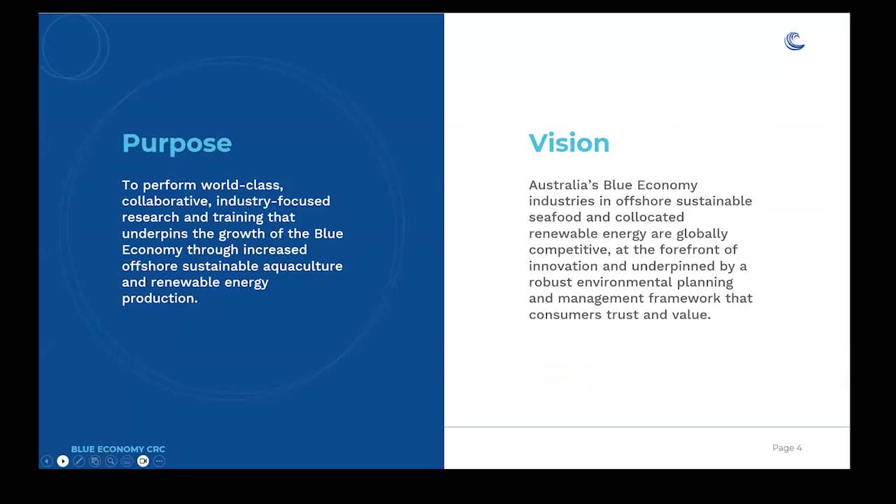Now, today's webinar is about the Blue Economy Symposium that was recently held at the 2025 OMAE conference in Vancouver. For over 4 decades, the OMAE conference has been the premier annual event to showcase leading-edge innovations and technological achievements in offshore engineering. Held within OMAE, the Blue Economy Symposium focused on the sustainable use of ocean resources for economic development, often featuring research and discussions on topics such as aquaculture, renewable energy, and offshore technology. Now, this webinar will highlight about 5 presentations from the Blue Economy Symposium event, providing an opportunity to hear high-quality research and gain insights from industry leaders on the current and future directions of the blue economy.

So please welcome our 5 guest speakers who will be presenting for us today. The first speaker is Associate Professor Zhi Yung Tay, an Associate Professor in the Engineering Cluster at the Singapore Institute of Technology. Our second speaker will be Thomas Johansson, co-CEO at Ocean Oasis AS and Senior Principal Specialist at DNV. The third speaker will be Associate Professor Peggy Chen, who is the Director of the Center for Maritime and Logistic Management, Australian Maritime College, University of Tasmania.

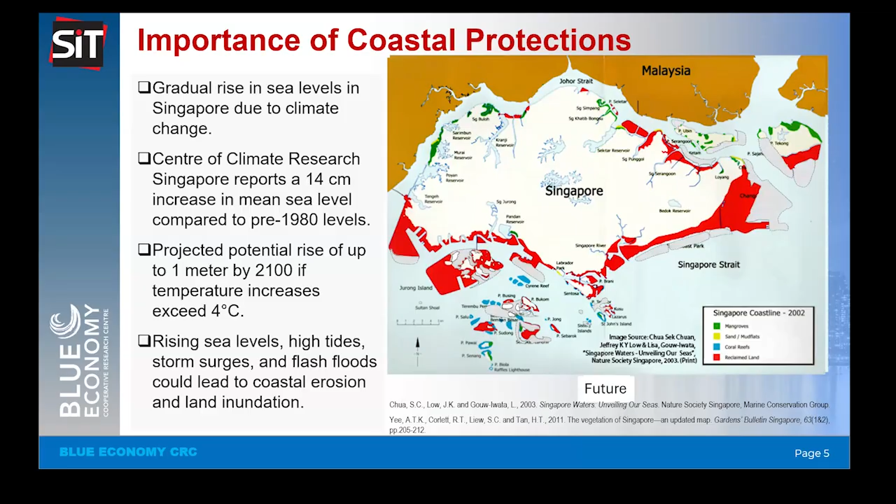So this shows the importance of coastal protection, and this map here shows Singapore in the 1950s. Back then, we still had a lot of vegetation, such as mangroves, which are important nature-based solutions to protect the shore against extreme weather conditions. Due to urbanization and the need for more land, land reclamation has been carried out in Singapore, and these red patches show the land that has been reclaimed. As a result, the number of mangroves as well as the vegetation has also reduced. And going forward, there'll be more reclaimed land. So if you look at the distribution of grey infrastructure around the shore of Singapore, most of it is seawalls, geotextiles, or breakwaters.

So even for the future, where we are going to protect the East Coast against the rise of seawater level, the bottom-founded land reclamation solution is sought in order to protect this area from the rise of seawater level. So the question then is, are there any other methods besides fixed grey infrastructures that can be used instead of these fixed structures or bottom-founded structures?

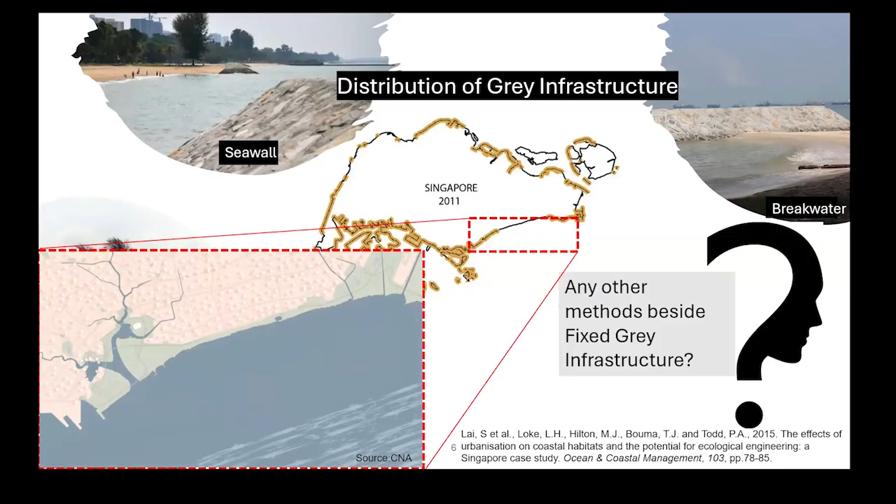So this project is a collaboration with NUS and NTU. It's entitled the Smart and Multifunctional Floating Structures for Coastal Protection and Flood Control. So in this project, we're proposing a floating breakwater that is multi-purpose, and this can be integrated with marine renewable energy, such as wave energy converters and tidal energy, to tap on this energy resource to generate electricity.

So floating breakwaters and marine energy converters, these are not new. There have been existing solutions in Singapore as well as around the world. For example, in Monaco, there is this floating breakwater, as well as in Sweden, breakwaters to protect the marinas from extreme weather. And one of the popular wave energy projects is this Eco Wave project, where they integrate point absorber arrays into the breakwater.

So the novelty lies in producing cost-effective floating breakwaters in relatively deep waters, and this will be tailored to the Singapore context in order to cater for the Singapore weather, as well as multifunctional with green energy harvesting in future applications.

All right, and some of the possible deployment sites, for example, in the south of Singapore, the southern islands, where we have good tidal energy resources, and this can be used also to create sheltered areas for industries such as aquaculture, or even to create a more sheltered area for marine electrification, such as charging stations for tugboats. So the novelty is to create a cost-effective floating breakwater in relatively deep waters and tailored for the Singapore context.

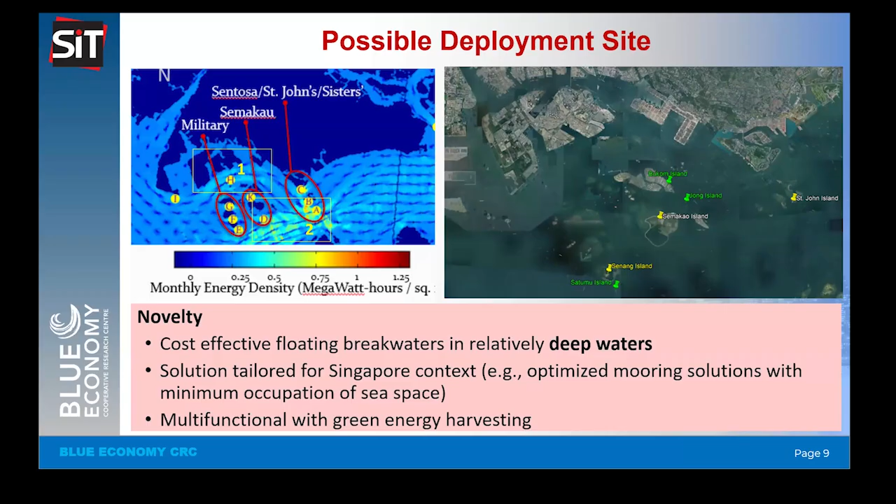So two types of concept solutions are proposed here. One is a fully floating breakwater, used for deep or intermediate water depth. And the second one would be a breakwater that is integrated with dikes or seawalls. So in the event of a rise in seawater level, the existing floating breakwater can still be used. Only the dikes and seawalls need to be retrofitted for designs of a higher mean seawater level.

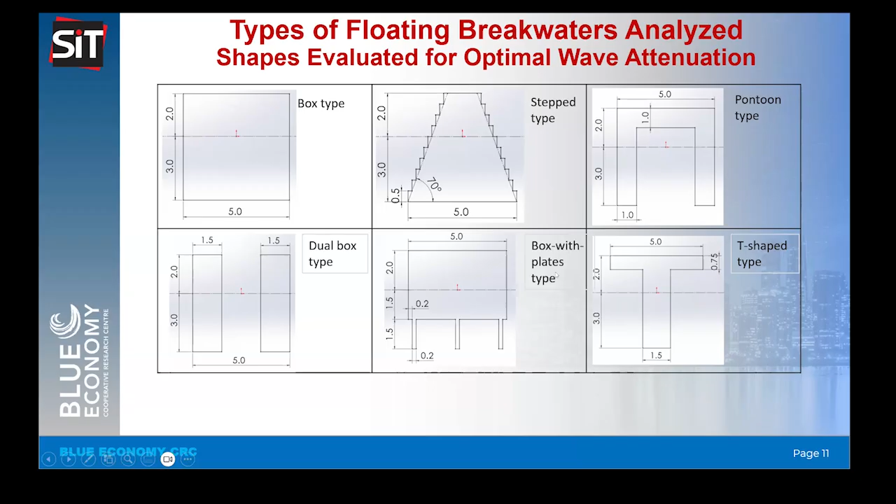So we consider 6 different types of geometry for the floating breakwater: the box type, step type, and also the pontoon, the dual box, as well as box with plates, and the T-shaped breakwater. So we use CFD simulations with ANSYS Fluent to obtain the wave elevations upstream and downstream of this breakwater. And the water depth is considered 10 meters. Wave height is 2 meters, which is a common wave height that we consider in Singapore. And 3 wave periods are considered, which are 4 seconds, 5 seconds, and 6 seconds.

So this is a result that we published in the World Conference on Floating Solutions back in 2024 in Hong Kong. So here we consider the two best geometries to attenuate the wave force, which are the pontoon type on the top as well as the step floating breakwater at the bottom. So here you can see that the step breakwater is more effective as compared to the pontoon type.

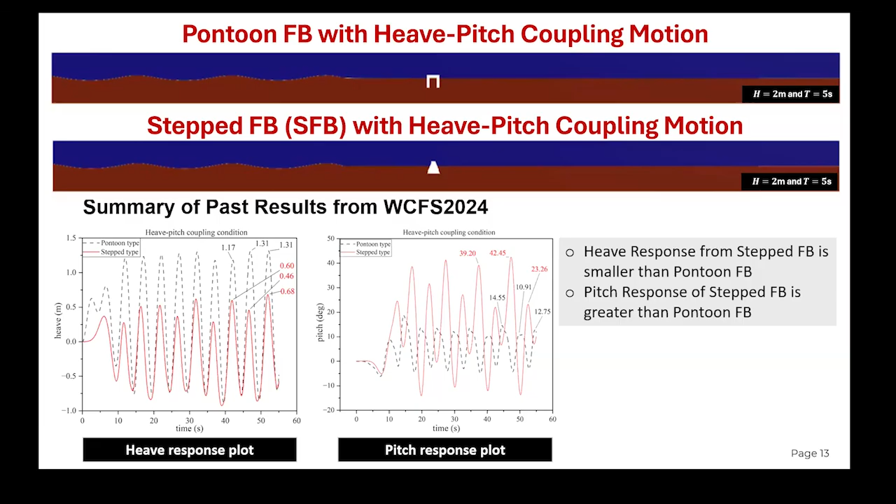And in terms of the motion, the heave response of the step floating breakwater is smaller as compared to the pontoon floating breakwater. But the pitch response of the step floating breakwater is greater than the pontoon floating breakwater. So again, this shows the wave elevations generated around the floating breakwater, and the step floating breakwater is proven to be a better solution as compared to the pontoon in terms of attenuating the wave force.

So then, we know that in order to produce a better design for the step floating breakwater, we need to constrain the pitching motion of the step floating breakwater, because this pitching motion will generate more waves downstream of the floating breakwater. So the research question then is what are the suitable types of mooring system that could minimize the motion of the floating breakwater and at the same time effectively attenuate the wave force.

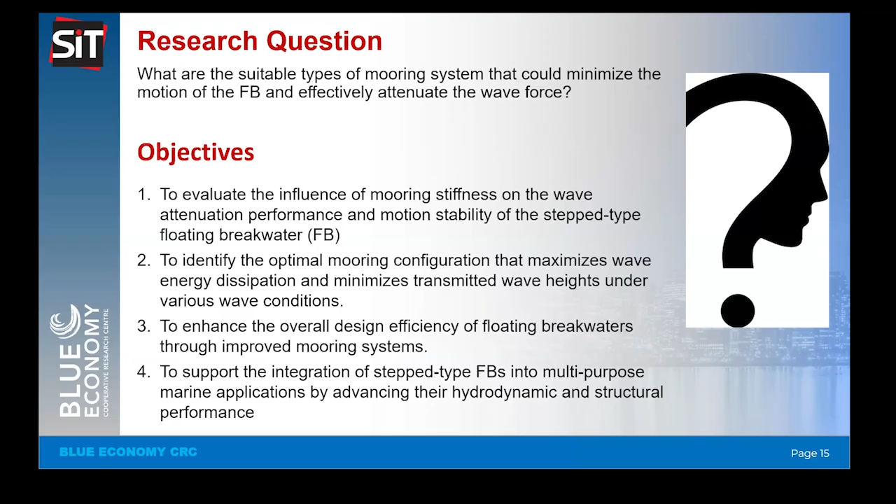So here the objective is to evaluate the influence of mooring stiffness on the motion as well as the wave attenuation, to identify the optimal mooring configurations, as well as to enhance the overall design efficiency of the floating breakwater. And here we show four different types of configuration. The first one is a step floating breakwater without mooring, abbreviated as SFB. The second one is the tension tendons, TT, the taut mooring, TM, as well as the catenary mooring, CM. So here we are considering regular and irregular waves, and the goal is to identify the most effective mooring configurations that enhance the wave attenuation and motion stability.

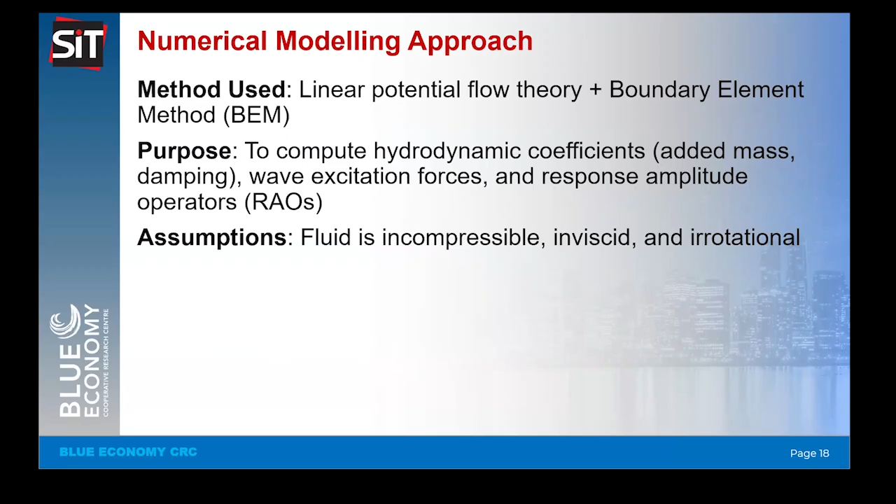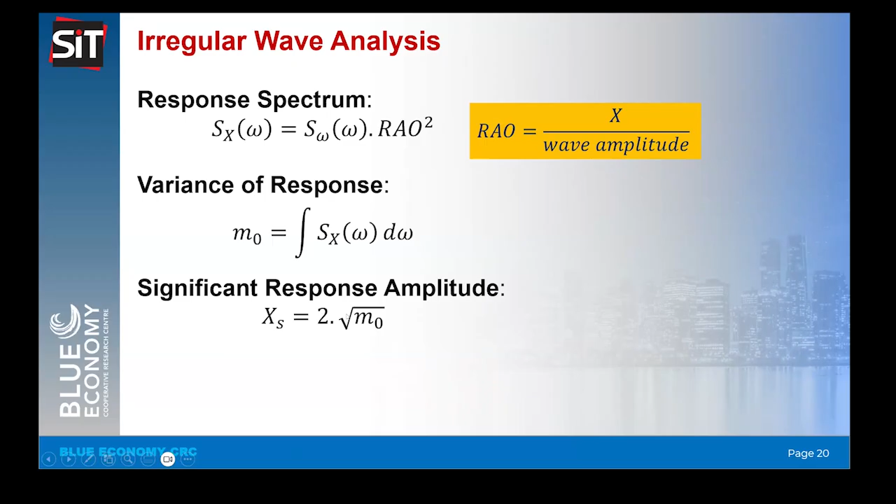For the irregular waves, we're assuming the Pierson-Moskowitz spectrum to generate the irregular waves. And in terms of irregular waves analysis, we'll be using these common formulations to obtain the significant response of the structures as well as the wave elevation. So now comes the results and discussion part. First of all, I'll be presenting the regular waves. This shows the hydrodynamic diffraction analysis of the step floating breakwater configurations.

For the unmoored step floating breakwater, the first natural period is around 4.1 seconds, and the second natural period is about 6 seconds. If we compare with the catenary mooring, the catenary moored step floating breakwater shows a significantly lower heave response as compared to the unmoored step floating breakwater. And it also has a lower second resonance wave period as compared to the unmoored version. This is because of the increase in the stiffness that will change the resonance period. And then for the tendon tension, there is a negligible heave response observed for both tendon tension and taut mooring configuration.

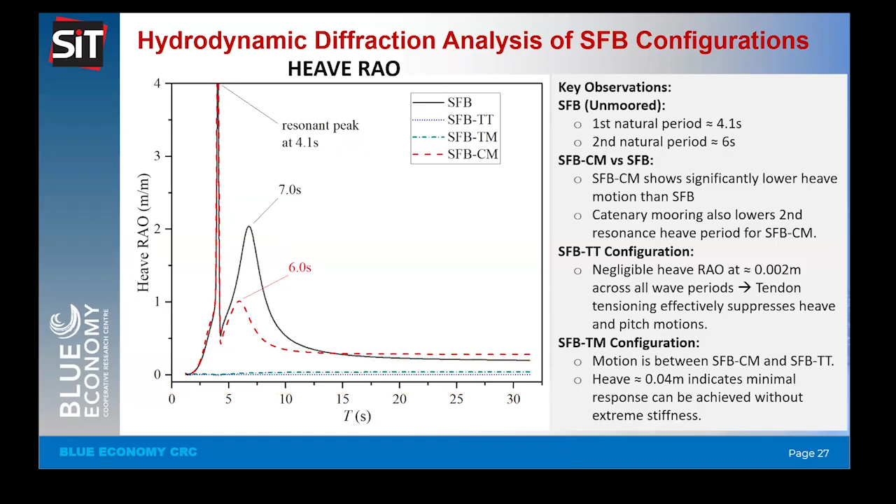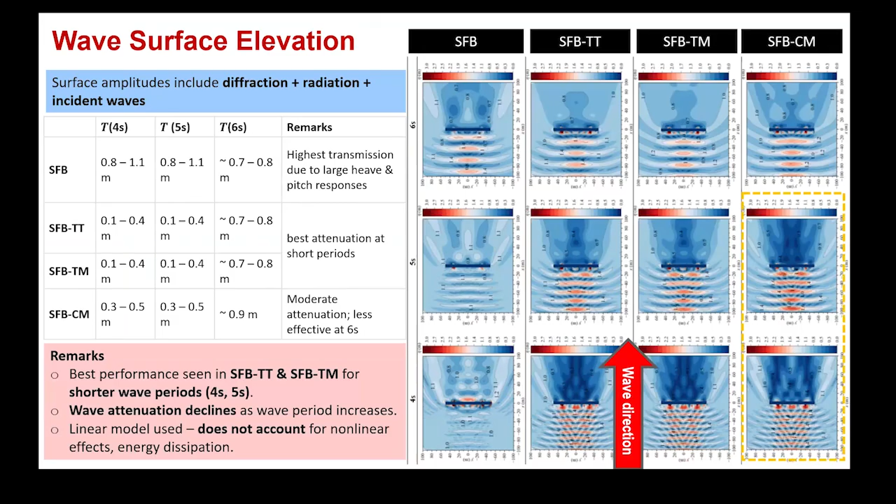So this shows the surface elevation surrounding the breakwater. The waves come from the south to the north, and the red contour shows higher wave elevations. Here we can see that for the unmoored step floating breakwater, the highest transmission occurs due to the large heave and pitch response. And for the tendon tension and the taut mooring, the best attenuation occurs when the wave period or the wavelength is short. And for the catenary mooring, moderate attenuation is observed, and it becomes less effective when the wave period is high.

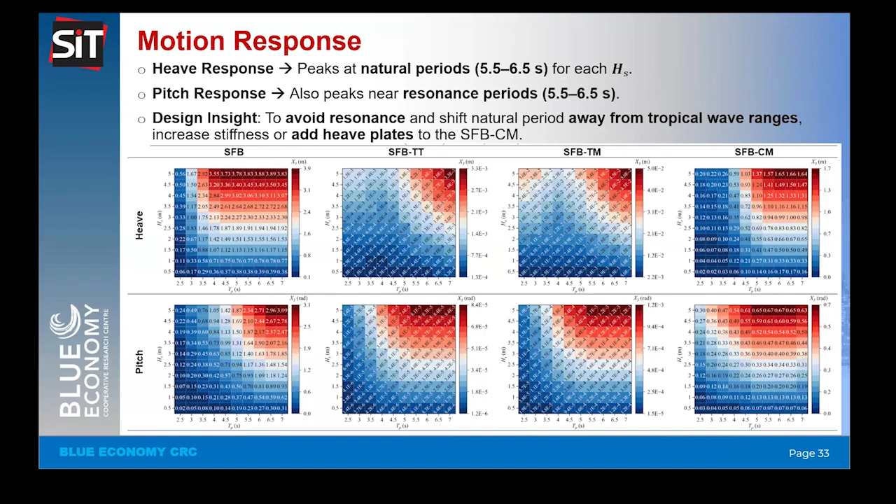As a conclusion, the stiffness actually helps to improve the performance of the floating breakwater in terms of the motion as well as the wave attenuation, especially when the wave period is small. The mooring stiffness plays a critical role in controlling the heave and pitch motion, and the taut mooring system offers a performance similar to the tendon tension, but with lower mooring stiffness, therefore making it a more efficient and viable alternative.

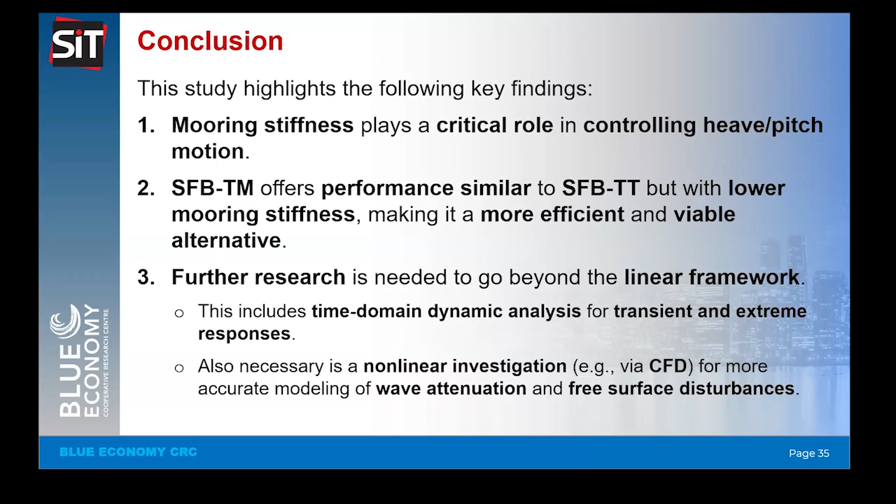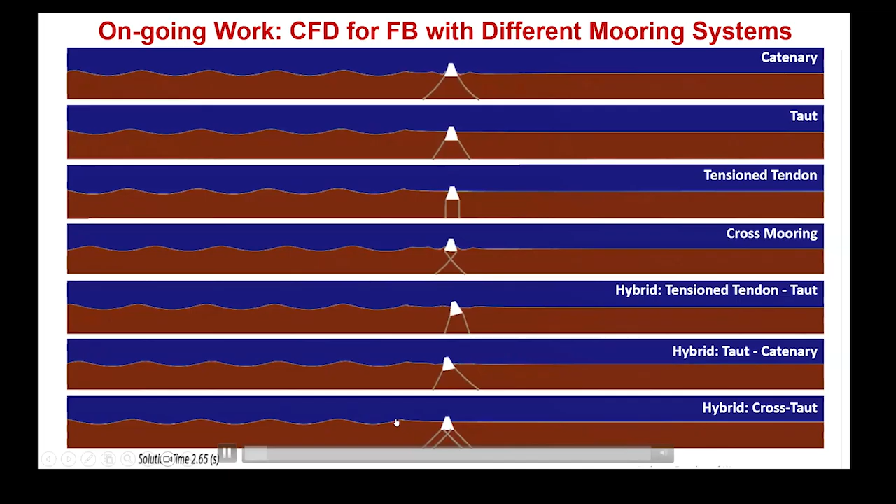And you can see also high reflected waves upstream the structures, where we can place, for example, wave energy converters in front of these structures to tap more energy, enhance the energy generation from the wave energy converters. All right, so that's all for my presentation, and I'm happy to answer any questions from the audience.

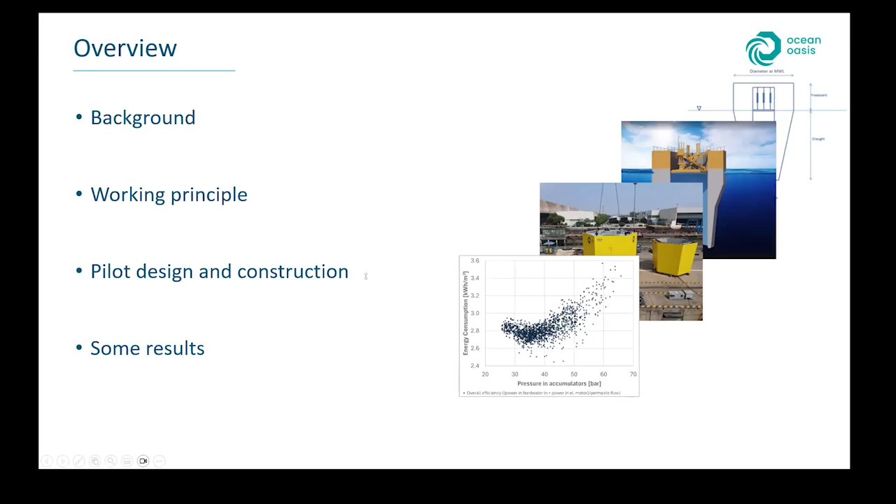Ocean Oasis is a Norwegian company developing a floating device for desalinating water using wave power as the only energy source. Today, I'll talk about our pilot testing, which we've been doing over the last 2 years. So quick background, go through the working principle of the Ocean Oasis, quick slideshow of the pilot design and construction, some results and conclusions, and to see a bit where we're going from here.

So this is the Ocean Oasis desalination buoy. My background is in offshore engineering. I started when I was doing concept development for Aqua Solutions, trying to, as an exercise, basically, see how we can use the experience from the Norwegian offshore sector to create a wave power device. So we need decent efficiency. We need survivability of a wave power device. With my background, I'm super skeptical about fixed installations on the seafloor. I would prefer a floating unit.

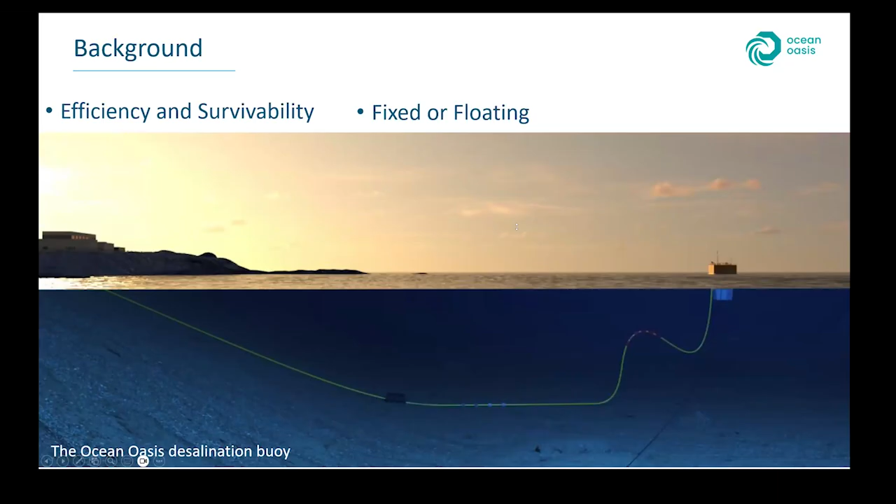And then what to use the energy for? Electricity is a challenge. Wave power is extremely variable. We decided to go for desalination of seawater. So you use the power to desalinate seawater. And this is the result: a floating buoy, a wave power device, desalinating water, leading water to shore with inexpensive hoses, the black type you see for all water transport, to an existing desalination plant on shore, providing additional water to existing desalination plants.

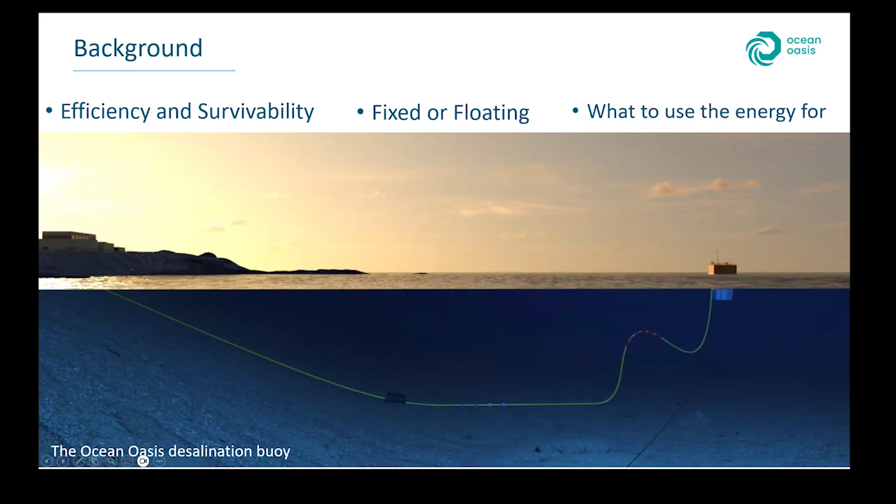So the working principle of wave power: instead of a fixed point on the seabed, we're using the relative motion of two large masses. One mass is the buoy itself, and the other mass, which we get for free, is the large volume of water inside a moon pool open to the area below. So if the wave frequency is between the natural frequencies in heave of the buoy and the resonance of the moon pool, then the mass in the moon pool and the buoy will oscillate in different phases, and we can take out the energy by the relative motion between the two. The disk is not part of the physics, it's just giving us something to grab onto to get that relative motion out.

So this is from a model test taken many years ago. One camera showing the buoy itself from the outside, and one camera looking down into the moon pool and the disk. You see that for moderate waves, we get quite a large relative motion. Energy is taken out here in the pistons between the disk and the buoy. And this is a lot of force here, so you can't push these together by hand. So it's a reasonably efficient wave power device, taking around 35% of the wave energy that passes the buoy out.

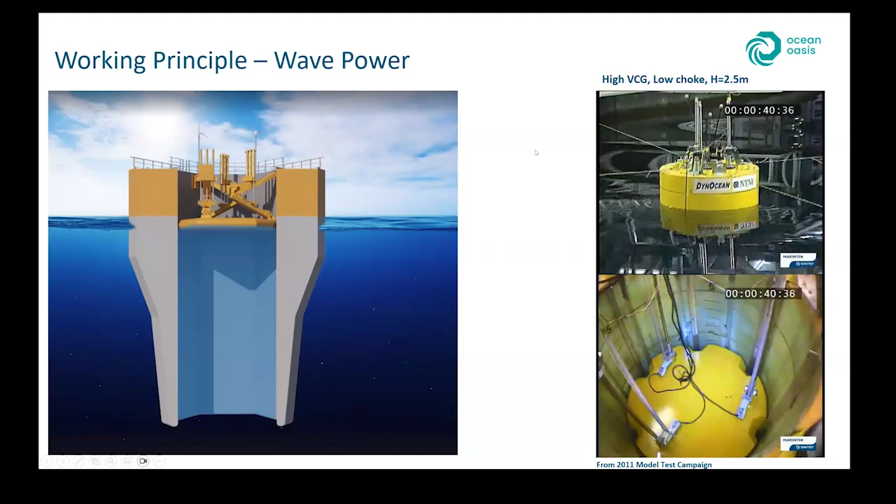Now, the working principle of desalination. Desalination is energy intensive, and the energy is used to pressurize seawater, drive it past a membrane so that only fresh water leaks through. We can't pass it through because then the membrane will be full of salt. We need to pass it past the membrane. Then we get super salty water out to the right here, and we need to recover that energy because that's still high pressure coming out here. So that's the fundamentals of desalination by reverse osmosis.

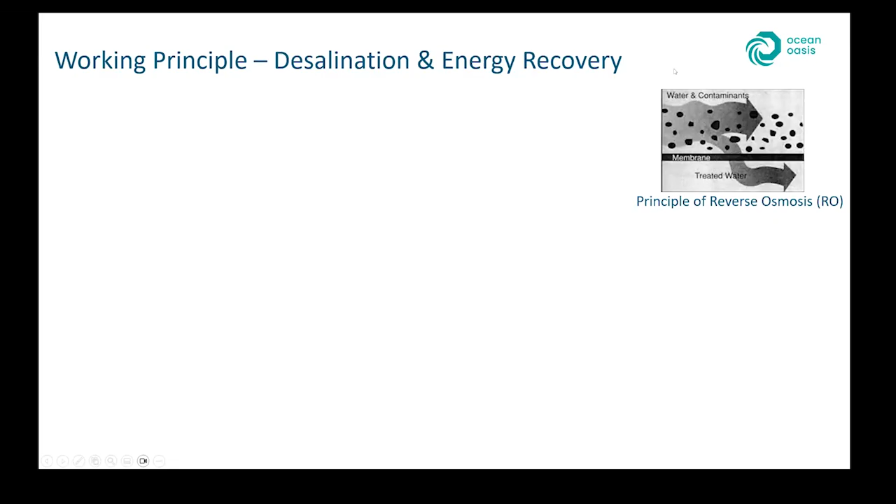Wave motion is extremely irregular, as you all know. We need to stabilize it because the membranes are quite delicate. We use an accumulator, but if you wanted to stabilize it sufficiently with accumulators, because of the extremely irregular nature of waves, you would need far too big accumulators.

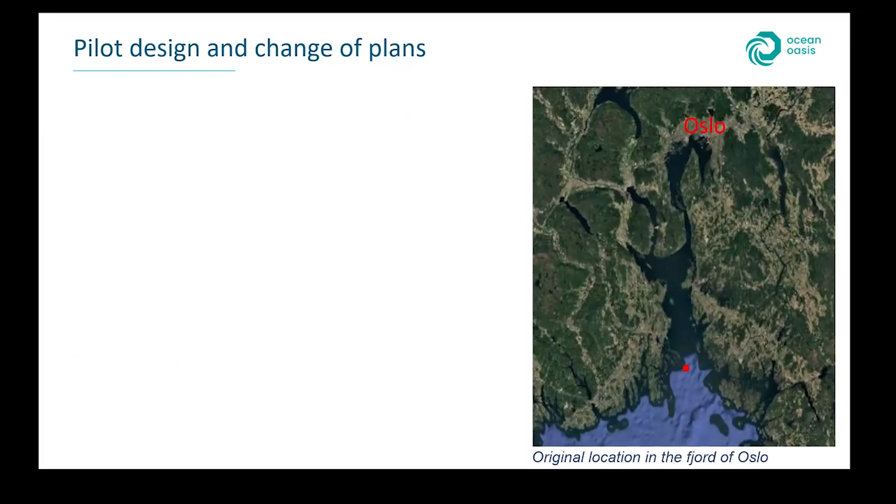Now pilot testing. We had the money to do a pilot test. We were going to test in National Park, and we got permission to test south of Oslo in the outer fjord of Oslo. This is an area I know better than my own living room. Relatively short waves, relatively low waves, and full control. This is a typical full-scale configuration for this environment. 7 meters diameter of the buoy, 8-meter draft, just over 100 tons displacement.

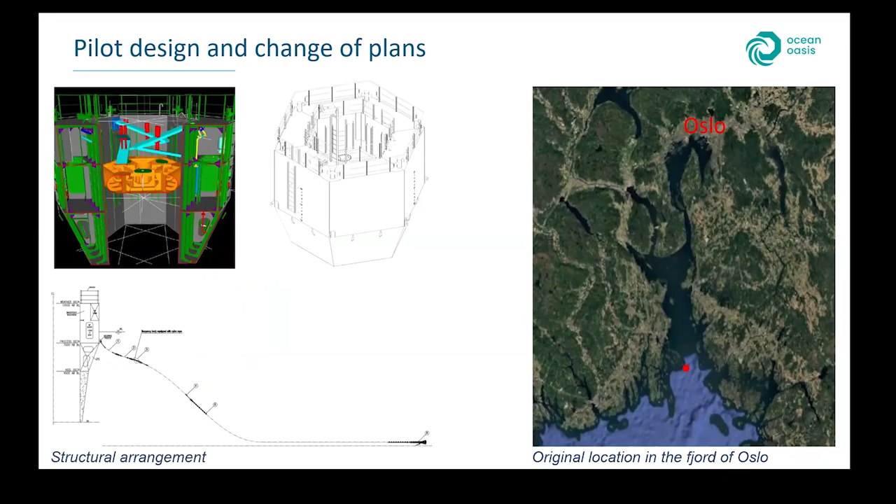So these are the sketches. We got a boat yard to make proper drawings to build this. Very simple catenary mooring system, and provided conservative loads for the shipyards to work with. So far so good. Then it got complicated. Two things happened. First of all, COVID struck. So within a few months, the construction cost was almost twice what it was before COVID. And the transport cost from China to Norway was more than twice the cost.

We couldn't afford that. We cannot go to China on our own. But of course, we trust to luck, as we always do. And it helps to have friends. So one of our main investors turned out they have used the shipyard here in China for more than 20 years. They had people in the yard doing construction follow-up, and they offered to stick Gaia on one of their vessels and let her off on the way back.

So the other thing that happened was that we got an opportunity to establish a subsidiary company with offices and workshop in Gran Canaria. And that was really super for us. Gran Canaria is the main desalination hub in the European economy. And it's also our beachhead market. So we couldn't say no to that.

So we moved the whole system down to Gran Canaria and decided to do the pilot testing here instead of here. It's fine, except that Gran Canaria has much longer waves, much bigger waves. And Gaia, as our pilot is called, is too small. So we did a lot of recalculations. We found that it can take it, but I lost my nerve on the mooring.

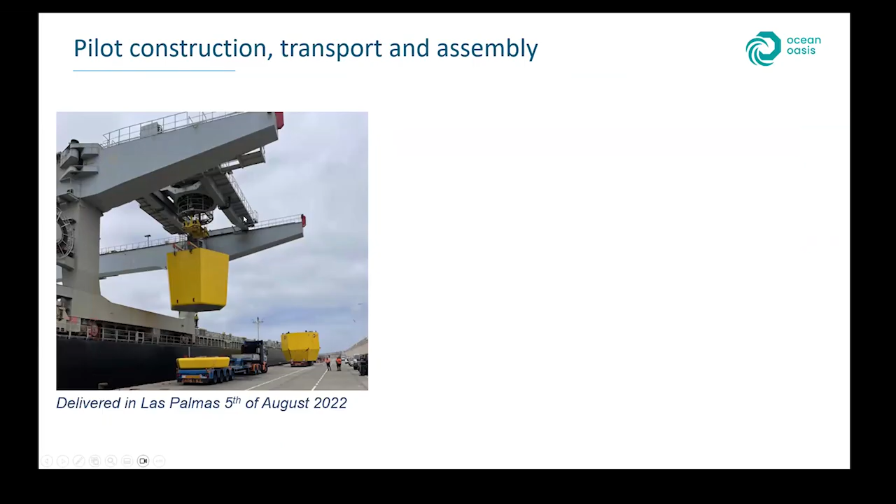Okay, so a bit of slideshow. This is construction in China, built in 3 parts: keel, main hull, and disc. Very good quality on the construction in the end. We're very happy with the solution we got. Nail-biting transport to Gran Canaria, delivered in Las Palmas. It's a big structure, but it was possible to take it on the trucks.

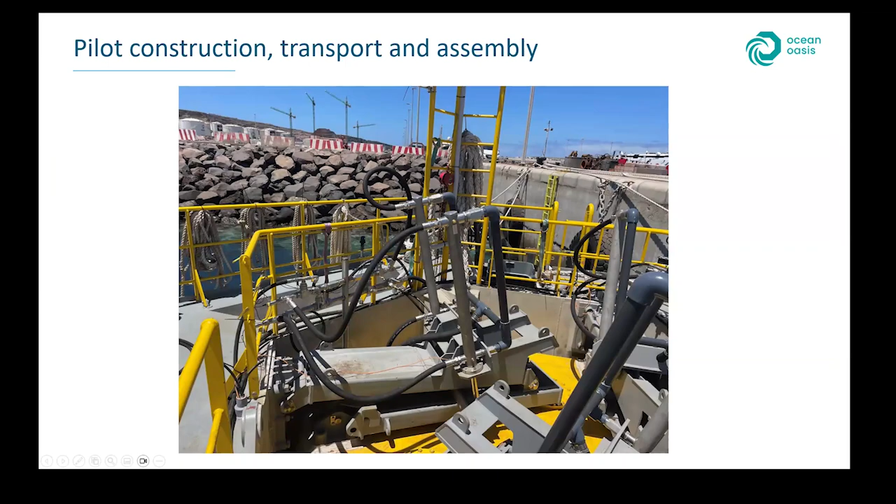Assembly here in Gran Canaria and launched to sea after anti-fouling. We spent half a year getting all the equipment and pipes and hoses and stuff installed. Naming ceremony with 3 of our directors. And this is Gaia in her home berth, where she's been for the last 3 years.

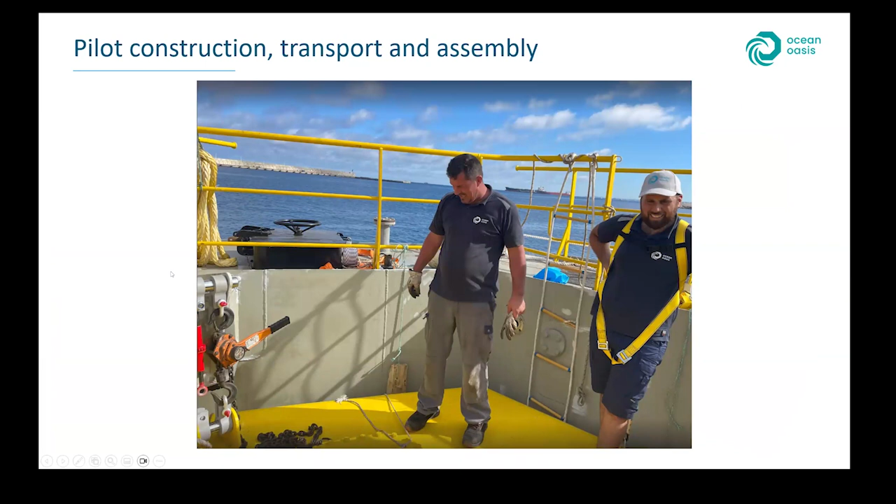Straight open to the south, very rarely, thankfully, waves from the south here. But it's been a real challenge to keep her, close to 100 tons, close to a concrete jetty. Lots of good times, and some bad times. This is where our chief mechanic finds out he's got 15 centimeters to go after lifting the disc manually for hours. First testing on Gaia in '23 was a big milestone.

And then after that, we've been testing. Instrumentation: we have motion, GPS, we have the relative position of the pumping arms. We have 5 flow meters on board, 21 pressure transducers on board. We measure freshwater quality, and we measure the voltage and current and charging state of the batteries on board. So we have 38 blocks of time series which we can analyze in stationary conditions.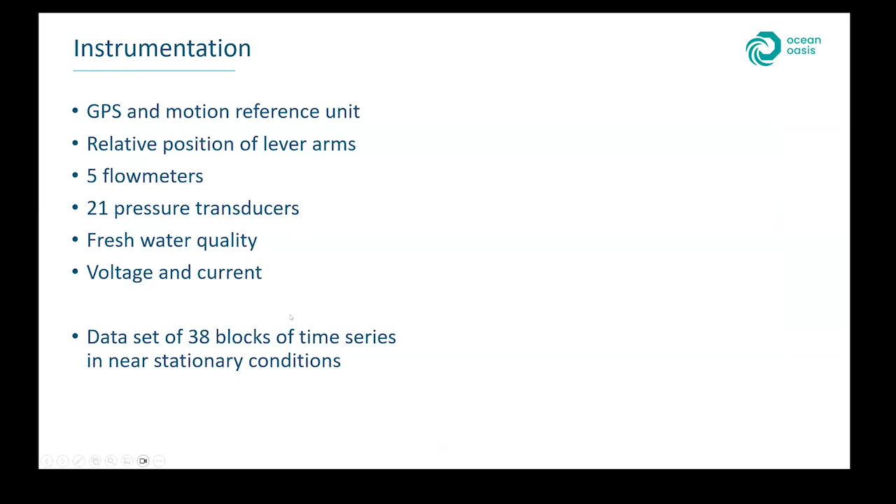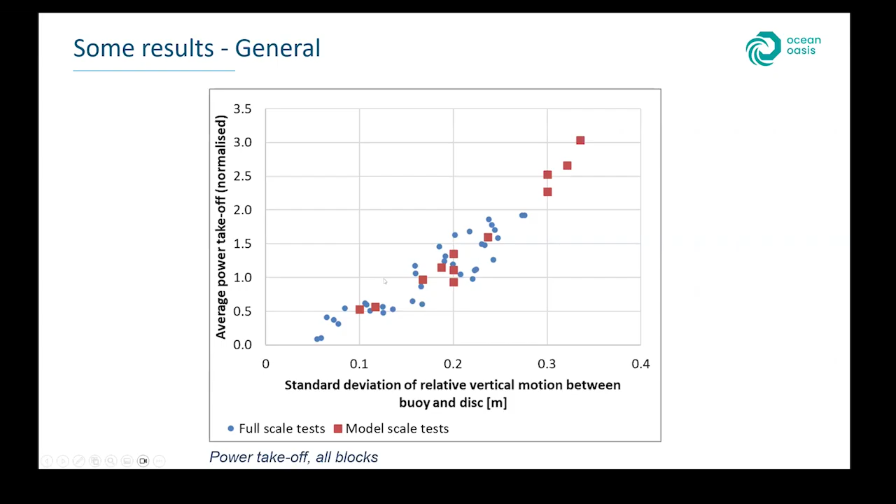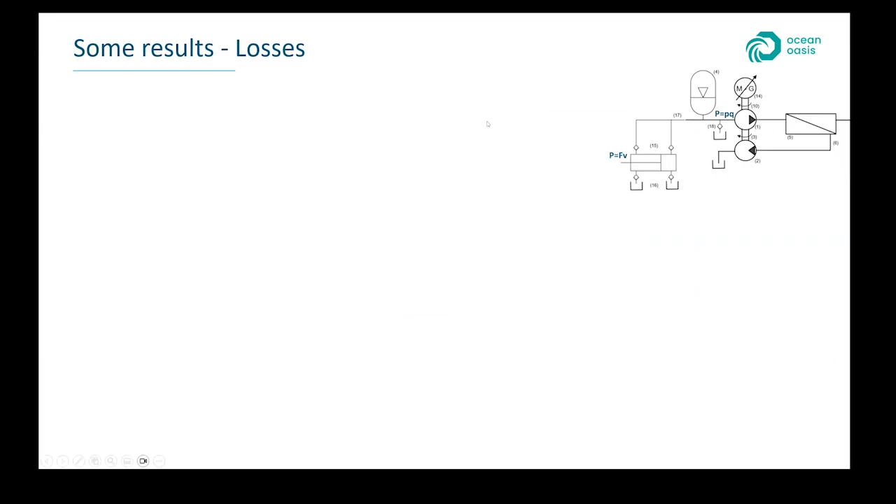We did an extensive model test 2 years ago, just plotting quickly the standard deviation of the relative motion against the actual power we get out. We have good agreement with the model test. Model testing is used to validate how much power we get out, how much power is delivered to the disk. In the pilot, we don't know the waves that well. So what we're looking for there is losses and fitness of purpose of the equipment we've chosen, and wear and tear on the systems. That's the essentials of this.

So look at losses. Take the power delivered to the disk. Power is force times velocity. Power is also pressure times flow. So you compare the power delivered to the disk with the power delivered to the desalination system. We actually get more than 80% of the power and more than 70% of the volume by the theoretical motion of the cylinders actually delivered to the desalination, and that's good enough. It's better than I expected, and we're not changing our design; this is good enough.

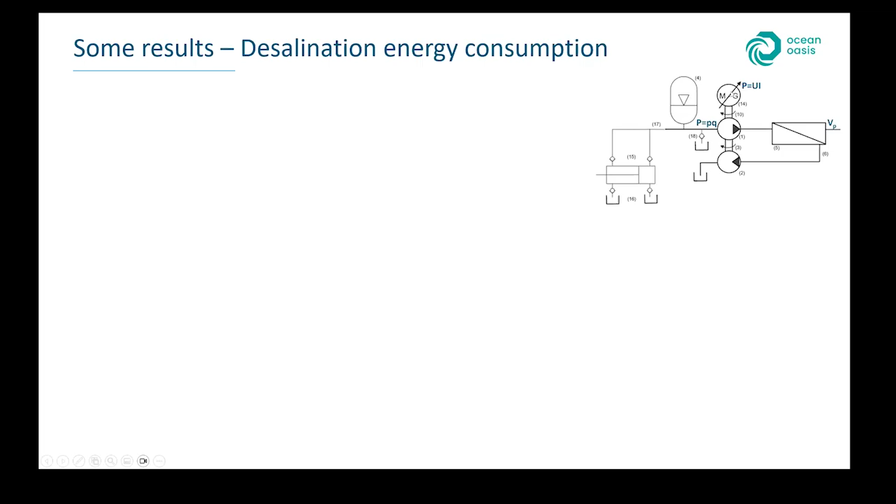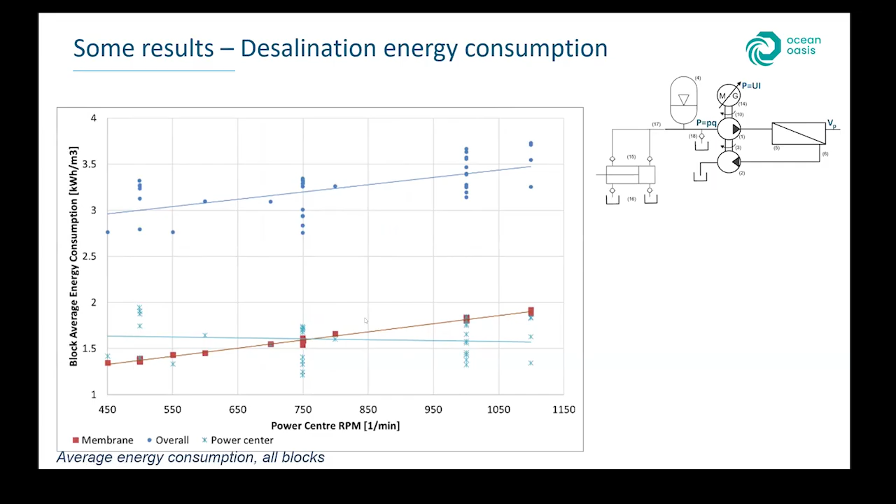You look at all the blocks that we tested, and we're above 3 kilowatt hours per cubic meter on average for each block. That's more than my target, which was 2.5. And it turns out we used 4-inch desalination membranes. They were running at the top of their capacity. We replaced this with 8-inch membranes, and we got the target we wanted. So basically this is working.

Where is the challenge? Most of the pilot is actually off-the-shelf equipment used within the intended spec. So for the desalination system, thanks to the power center, we can actually use standard off-the-shelf membranes and membrane housings, the same they use in onshore desalination plants. The lever arms are designed for purpose, and the cylinders are operating with seawater, with a different characteristic than they're designed for. So we have to really keep an eye on that.

We had some wear on the bearings on the lever arms. The end stop of the lever arm was not the best. It's taking too much. It's like a nutcracker. And the cylinders were getting some wear on the rods because the system here was too soft. They were bending a bit and giving a moment in the arms. So we're working on redesigning or improving the design of the lever arms. Otherwise, there was no significant wear and tear after the 100 hours we tested.

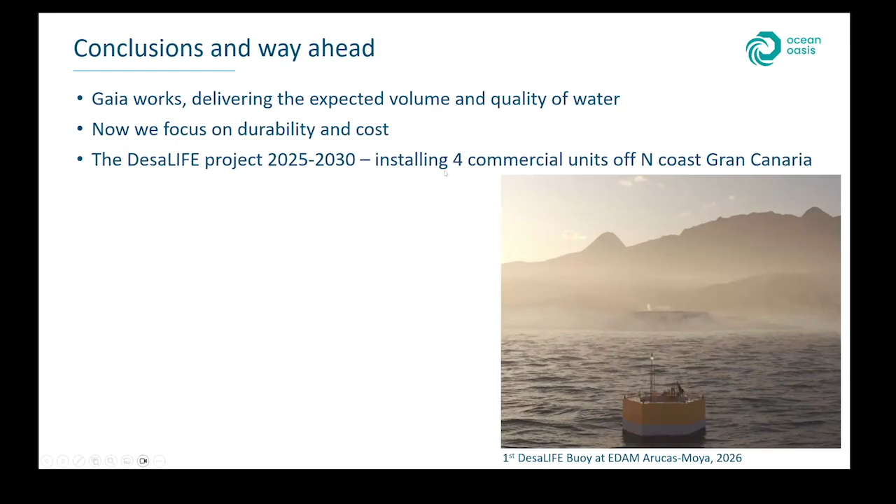Our ambition is to deliver water profitably within a year or two in the next project we're doing. We recently had a 6 million grant from the European Commission, and we have an agreement with an existing desalination plant in the north of the island here, which really desperately needs to increase capacity. And we're installing 4 much larger commercial units in the DesaLIFE project over the next 5 years.

We are in contact with 4 other desalination plants that really need to expand. They are in Gran Canaria or in the Canary Islands. 85% of the water is desalinated for domestic use. They're all under pressure to increase capacity, and they will not be allowed to use the grid more heavily. So they're quite desperate. So our first market is here.

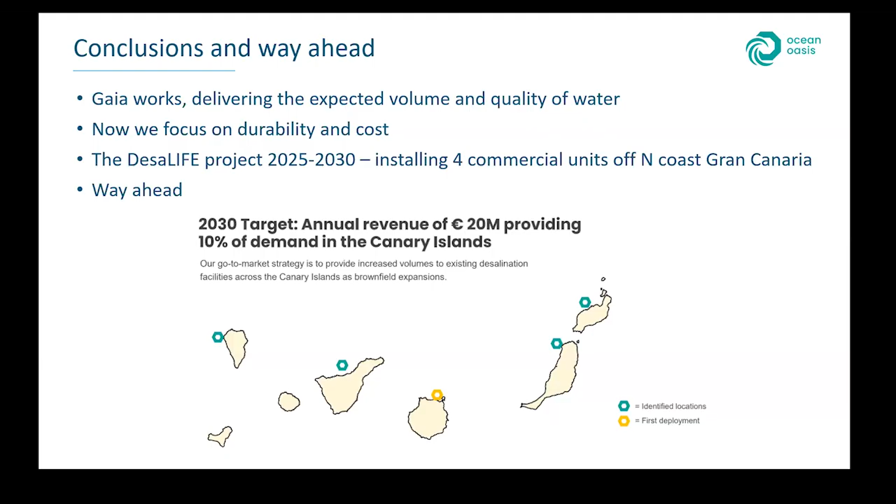Then we are talking to Chile, to the Aegean Sea, to the southern part of Africa, to Australia, and for other purposes. So that's it. Thank you.

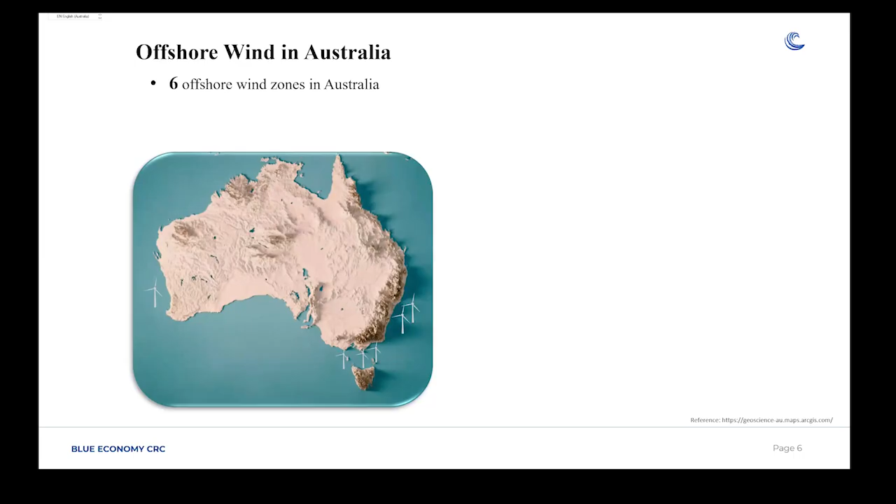As I mentioned earlier, we had around 12 or 13 interviews with developers, government, and other organizations, including ports. There are different challenges, especially on ports. Developers really consider whether one port, one project at a time is suitable, or it has to be multiple ports. From the port perspective, they are worried about whether the land size is sufficient, whether it's possible to get funding for upgrades, and whether the development will continue. So there are a lot of concerns there.

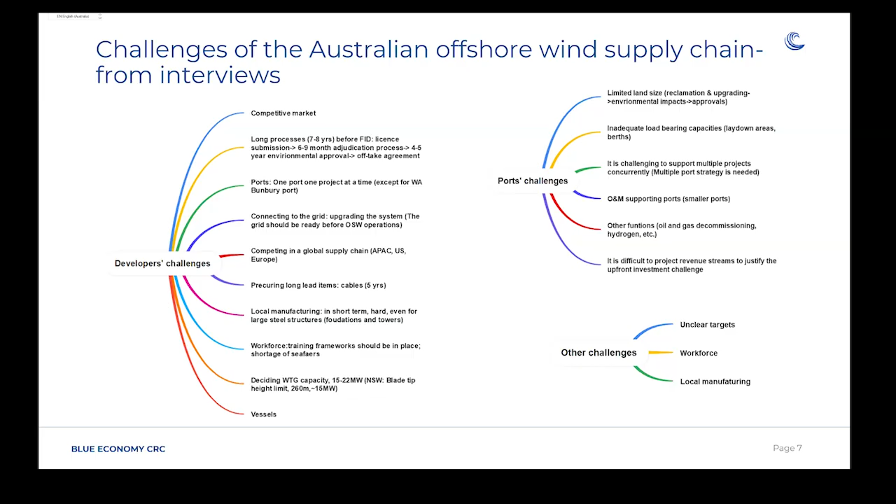Another concern relevant to the port strategy is: where are the national targets for offshore wind development in Australia? Currently, only the Victorian government has a clear target, but other states do not. That also affects the confidence of developers in Australia. So based on this, we did a survey of all the stakeholders, and using the model, we found port availability is the second challenge they are most concerned about.

So that's today's focus, and we try to get some insight using mathematical modeling. Before we go to the modeling, I want to show you, because now we are really in this area, a basic understanding of the port's role in the offshore wind supply chain.

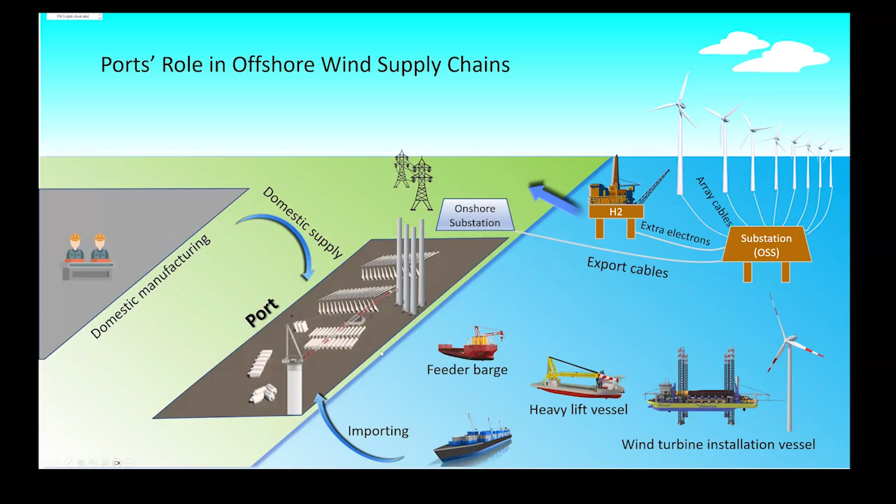So this is the layout of the port. If we can produce components for offshore wind, they may come from domestic manufacturing to the port, and there's storage here for deployment offshore. But if we cannot produce the major components, they may need to be imported. So the port also needs to accommodate all the imported components, and also needs to provide berths for the different vessels, such as the O&M vessel or the SOV, etc. So this is the overview of a port's role in the offshore wind supply chain.

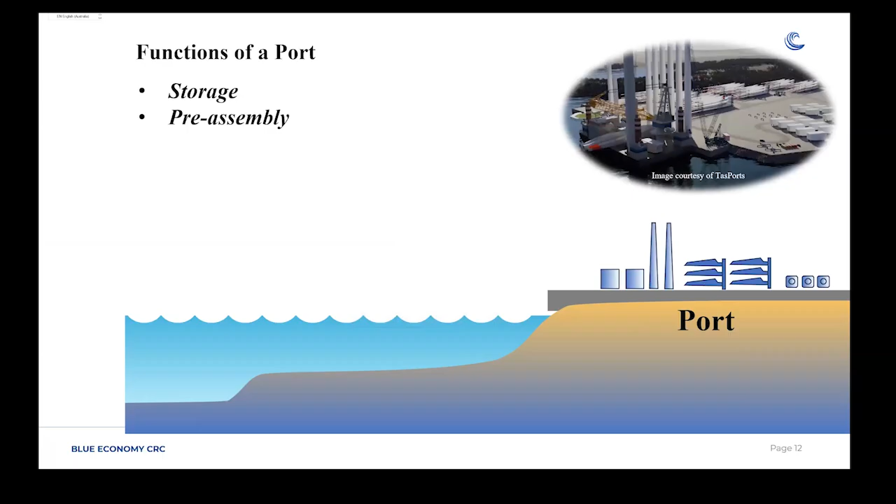If I further use the animation, you will see the port imports all the components and stores them in the port. For foundations, if we use jacket foundations, or even the substation, they can be produced by the manufacturer and then shipped to the offshore site. So maybe the port does not need that. But if produced domestically, then maybe the port needs to have that storage area.

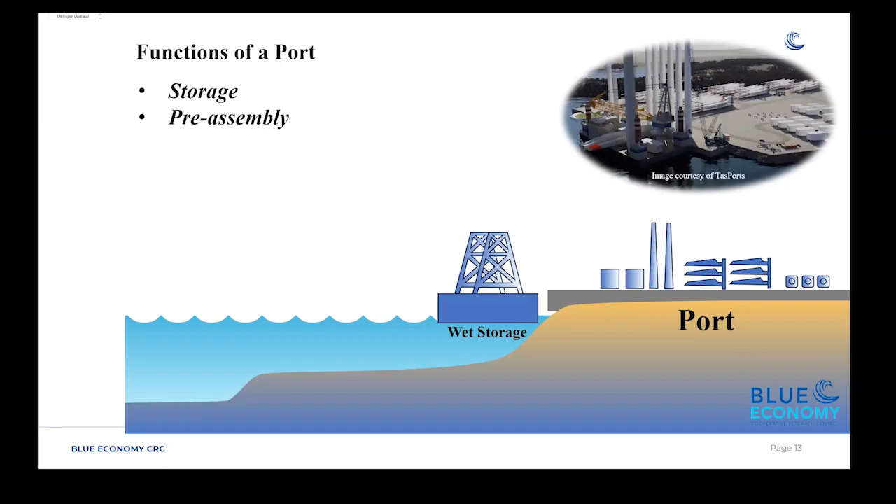But anyway, the feeder vessel transports all the wind turbine components to the offshore site for installation, and then goes back to the port for the next shipment to help the installation of the offshore wind. So that's a very simple introduction of the port's function in the offshore wind industry.

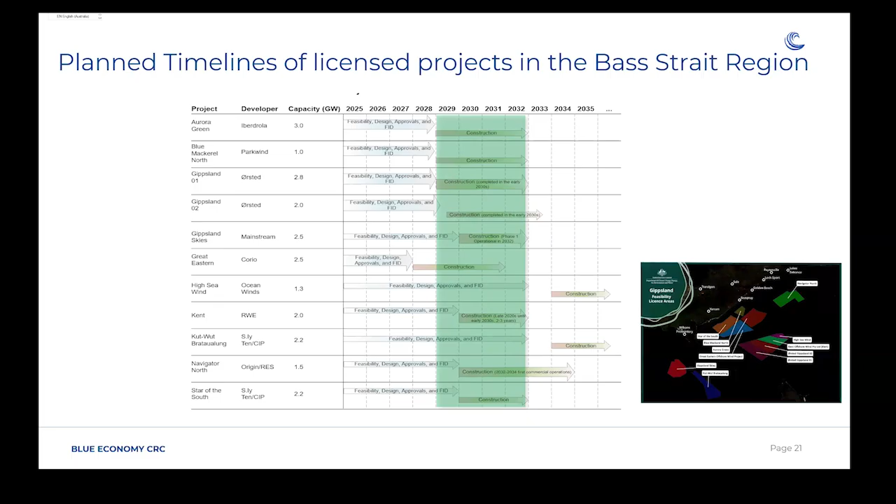This slide shows you the current planned timeline for the projects in the Bass Strait region. As I mentioned, there are 11 developers. If you look at the small map on the right-hand side and all their plans, you can see the possible construction period will be between 2029 and 2032. So if they all start together, or maybe 4 or 5 start during that time, the ports in that region may not be able to support them.

So the issue now is which port use strategy, independent one-to-one project or shared, gives better efficiency in terms of two functions, storage utilization and construction timeline. Because each developer wants to complete their project as soon as possible. So this is the research question. For one-to-one, it's easy and simple: one project, just one port to serve.

But there may be some issues; for example, if more projects come in, there may be congestion and they need to queue. Multiple ports means putting all the potential ports into a network, pooling all the storage and operational resources together to reduce the bottleneck. So these are the two strategies we use for analysis.

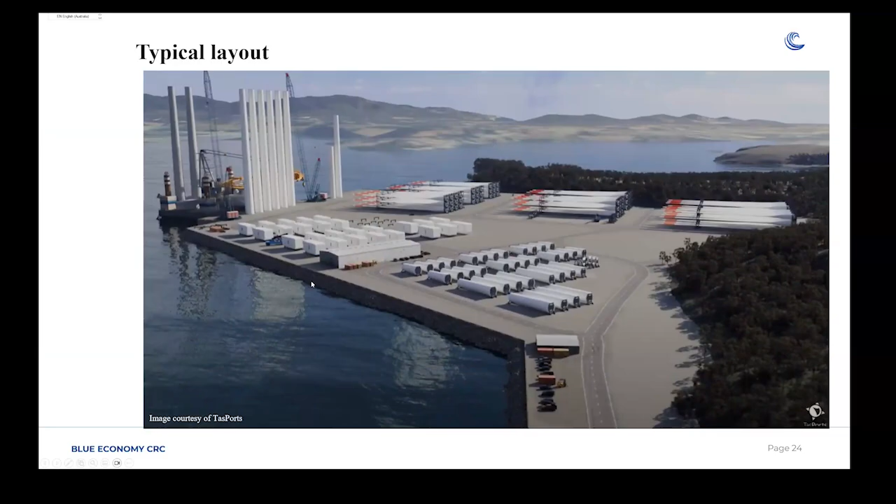This is a typical layout of the port. You can see the tower and the turbine blades in 3-layer storage, and also the nacelle. This is a pre-storage area, and this is a pre-assembly area. And this is a berth for the vessel to load and unload the components.

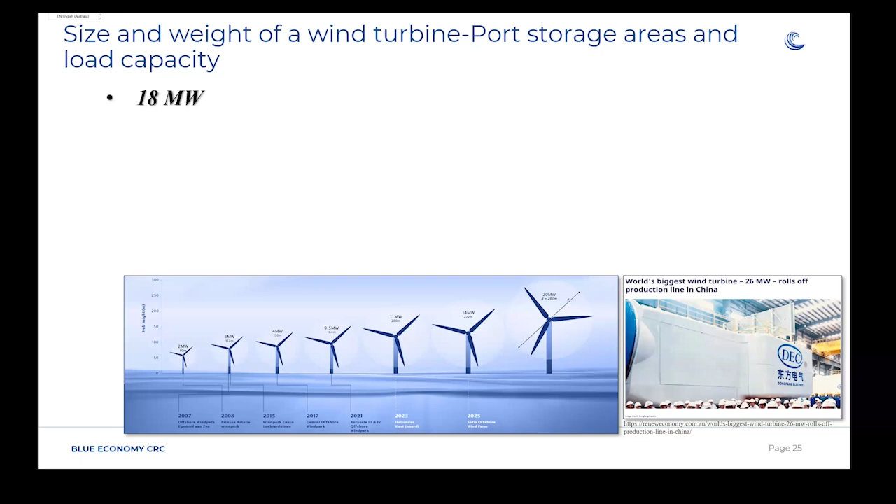For this study, because it's about 2029 or 2030, we assume the turbine size will be 18 megawatts. This is very important to determine how big a storage area the ports need to have or upgrade. So for 18 megawatts, this is all the information about the size of the tower, blades, and nacelle. And we calculate how many turbines are required, and how many hectares are required for each project of 2 gigawatts. Next slide, I show you our modeling assumptions. We assume each project has 2 gigawatts using the 18 megawatt turbine.

So probably in total, it requires 111 turbines to be installed on that site and two substations. And we assumed 100% jacket foundation, considering all the geotechnical issues there and also the turbine. So we assume we use jacket foundation, pin pile jacket foundation, and installation duration is 15 days per wind turbine, and substation is 30 days. So two would be 60 days.

And we assume that the construction window per year is 12 months. Of course, this can be changed because the vessel needs to do some maintenance. So it may not be the whole year, but we assume that it's 12 months because from our interviews, developers may assume that it can be 12 months. And we assume there are 2 installation vessels per project and 2 feeders.

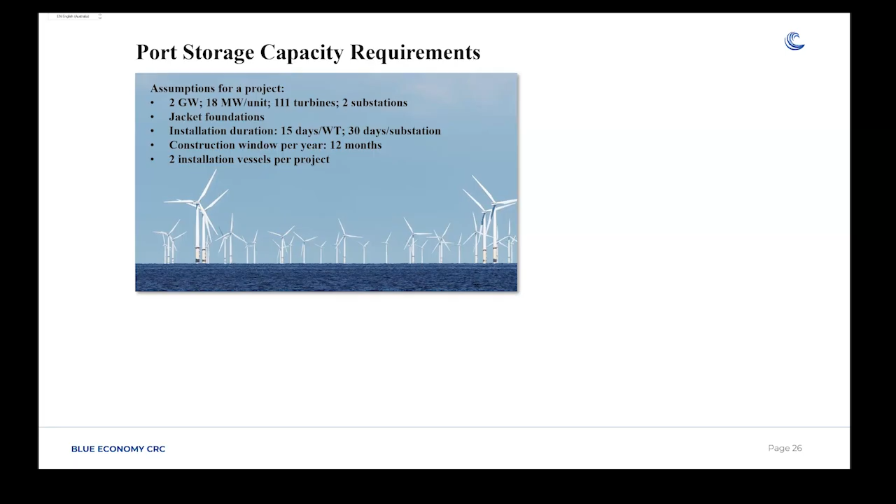So when we calculate based on all these numbers, actually the total area of port storage for 111 turbine components is maybe 47 hectares. However, we don't need that much because of procurement. You won't be able to procure all of them and store them there. So we assume 3 equal procurement batches per project, so that probably requires, for a 2 gigawatt project, only around 16 hectares of port area.

So we use this to do the analysis. If you use 1 port, 1 project, it's easier because there are just 4. But after 5, it could be an issue. That's why we use this approach to calculate the storage requirement and port utilization ratio, and also analyze the construction time for independent or shared. For the construction time for each project, we consider pre-assembly time, component transportation time, a round trip, and also offshore installation time. We also analyze bottlenecks and queuing delay if we use the independent port strategy, 1 port, 1 project.

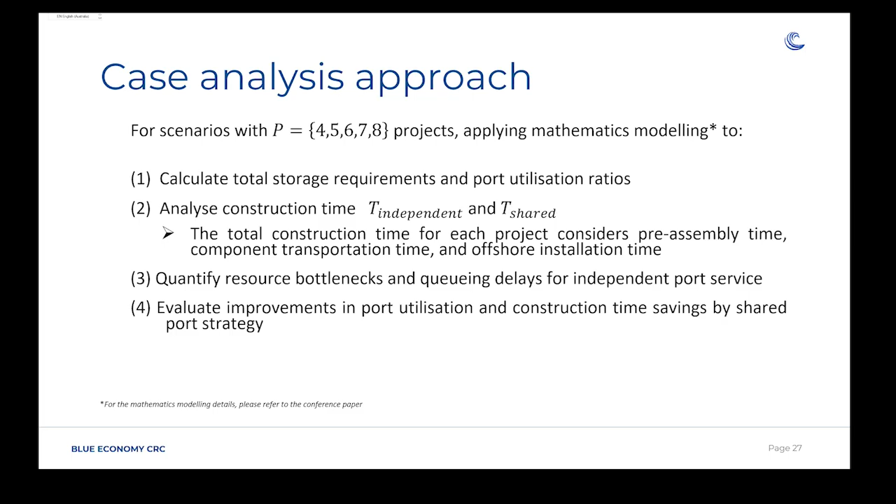And then we compare if we use a shared-use strategy, what's the benefit? For example, how many days can be saved for construction? So I tried to analyze those. So this is the findings we got.

For the independent port strategy, 1 port 1 project, you will see all the 4 ports can support each project. These 2 ports, A and B, may still have some space, but D is smaller, that's why it is fully utilized. The other ports may still have space, but they could not accommodate 2 projects, except maybe B. So the total construction time is 892 days for 4 projects. But if you want to do the next 4 projects, you need another 892 days.

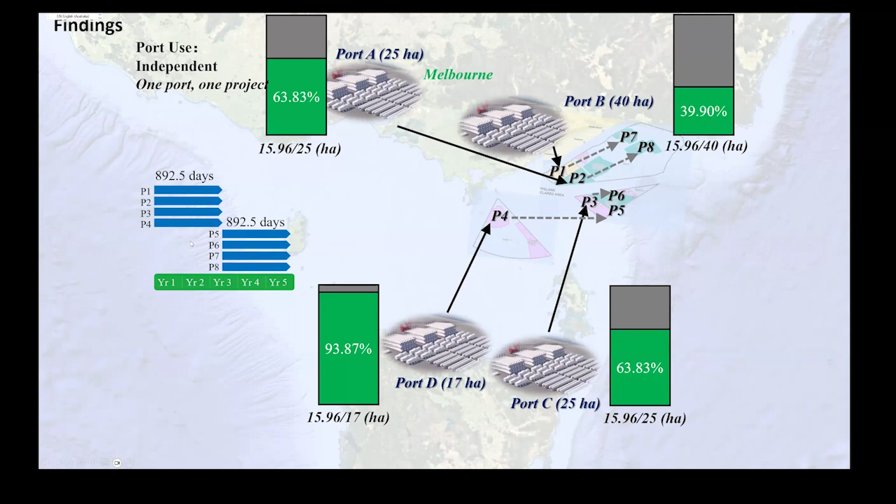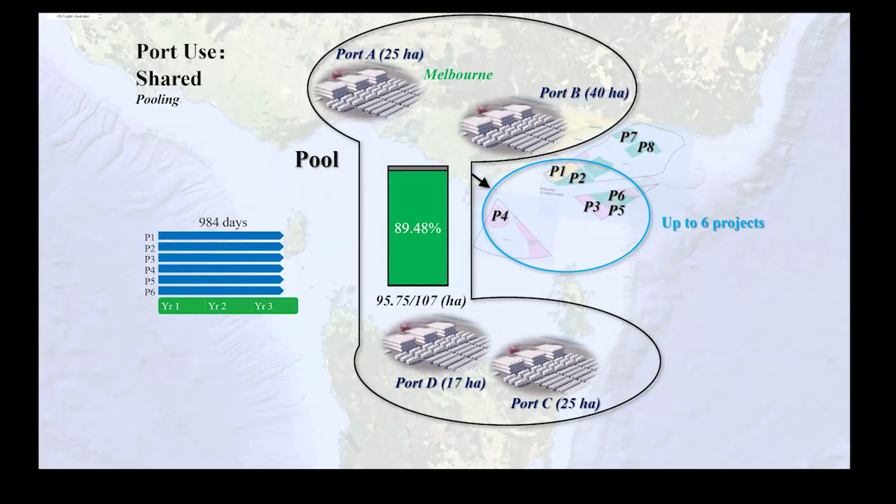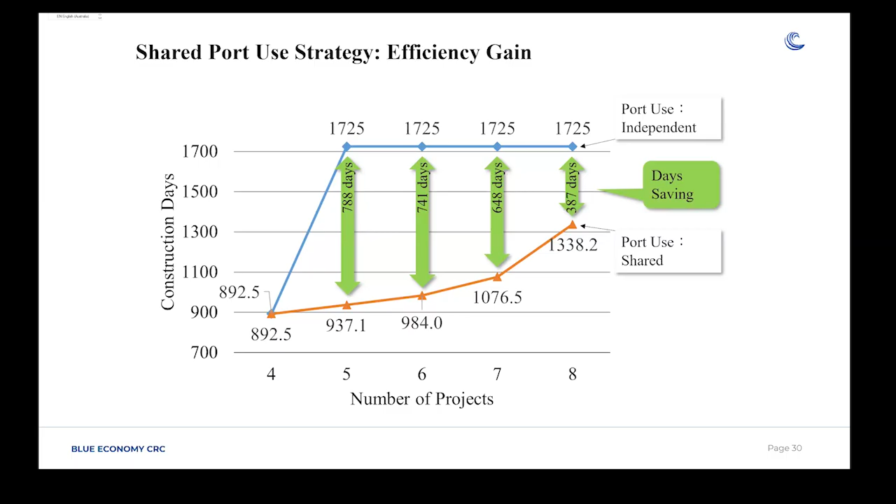So that becomes longer. If we pool them all together and use a shared strategy, the finding is like this. We can accommodate up to 6 projects with very good utilization of the ports in total, and the construction days can be reduced to 984 days. The next slide shows the benefits: for the shared strategy, 4 is similar, but 5 saves the most days, and 6 is still okay because the ports are not fully utilized. If you go over that, it's overutilized, so there's a bottleneck. So we can save some construction days, and that shows the gain of the shared port strategy.

So the conclusion of this project is that we compared the independent and the shared port strategy. The key metrics for this comparison are port storage utilization and the construction timeline. Apparently the shared-use strategy within these 4 ports is more efficient than the independent one, and we can serve up to 6 projects. It's more efficient when the project number exceeds port capacity. Independent is easy to coordinate, but with larger scale development, that will be the trouble.

But I want to mention some limitations of our modeling. For example, we assume 2 installation vessels and 2 feeders. We don't know, if 6 projects commence simultaneously, whether there are so many vessels. So supply chain availability needs to be considered. The second is that because the government is doing the auction, commencement should be based on the auction results. They may not all come together, maybe 2 or 3 together, so commencement times will differ, and we need to adjust that in future. Also, as I mentioned, vessel maintenance may affect the operating window.

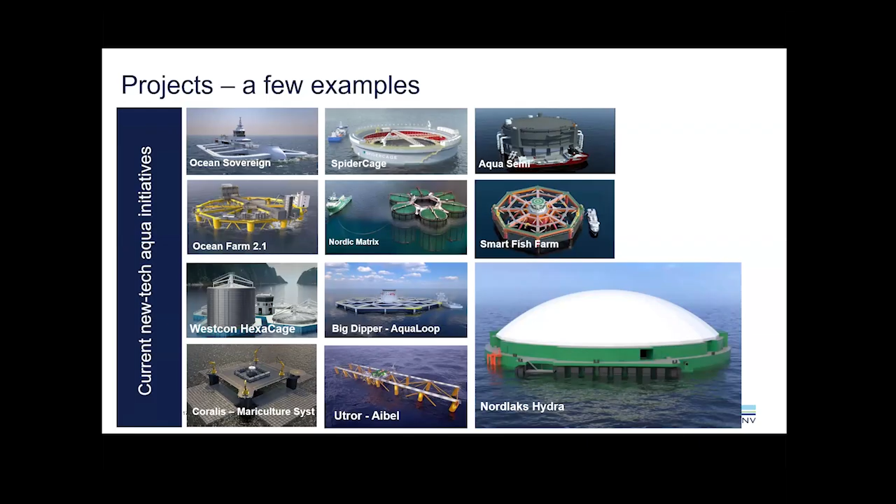Last but not least, I just want to share with you a few of the mega trends that very much affect the risk landscape that we need to relate to. Industrialization, we just saw a good example. Another very significant item in this context is society at large and what kind of expectations government and consumers are putting towards fish farming and aquaculture. More specifically, authorities when it comes to fish welfare and biodiversity, and the social license to fish farm from society at large, the press and the consumers. And especially in Europe, we see an increasing trend from finance and banking that you need to prove and document your sustainability. Then you'll get good conditions on your financing and loans.

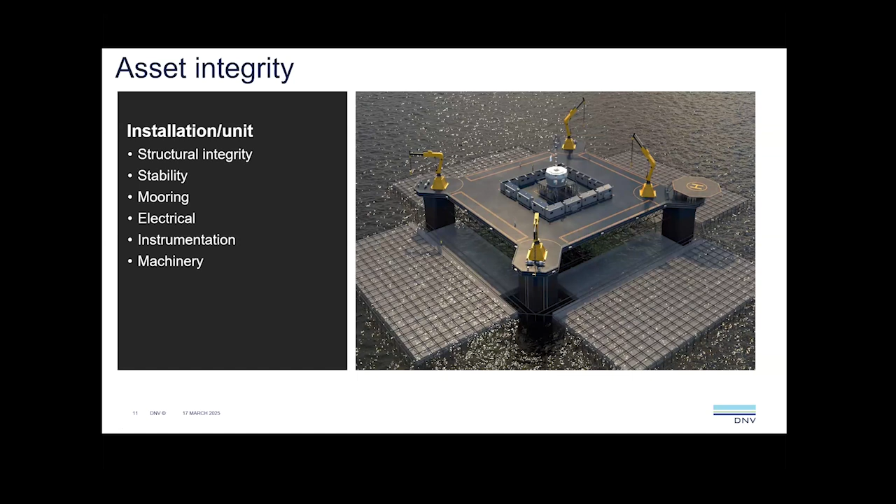Another aspect when it comes to asset integrity is, of course, that we need to rely on all the equipment and the systems being installed on board. And then not only systems and equipment supporting marine main function, but also maintaining fish control, making sure that no fish escapes, also monitoring and limiting waste and dispersion to the sea, maintaining ocean health, and of course fish welfare.

Moving down the list, the next point you may recall was HSE, personnel safety. Here we also very much can, if relevant, relate to the marine codes that we know so well when it comes to fire safety, life saving, emergency evacuation, if that is necessary at the most extreme extent. Second item when it comes to personnel safety is occupational health or occupational issues while working out there.

And in Europe, we see that aquaculture workers, fish farmers, are number 2 on the list when it comes to registered health and safety issues at their working place due to falling objects, maybe working at heights, but mostly pinching and crushing is very high on the list, unfortunately, we see.

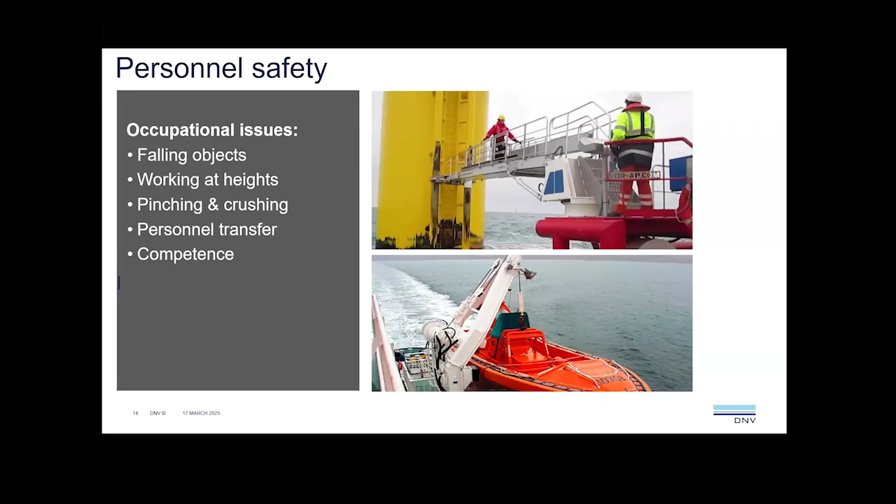And then an important item is, of course, personnel transfer. You need to transfer personnel from one installation or one unit or vessel to another, and that is always a very risky operation. Competence, last but not least, competence in the meaning of mindset towards safety is something that needs to be attended to, and we actually need to be improved, we see very much.

Third item was fish welfare. Fish welfare is mainly related to physical health of the fish, but also very much concerned is the behavioral needs of the fish. Different types of fish behave in different ways and are more healthy and grow faster and like it much better when they, for example, are able to swim in circular motions and not meeting a corner.

Other environmental conditions that is more moving into the area of water quality, water turbidity and salinity, temperature of water and similar. Diet, nutrition, something that we see a lot is what we refer to as stocking density. If it's too crowded, the fish welfare index goes down, and very much crowding and transportation, fish handling in general really is reported to stress out the fish and will cause diseases, especially of the more weak parts of the fish crowd.

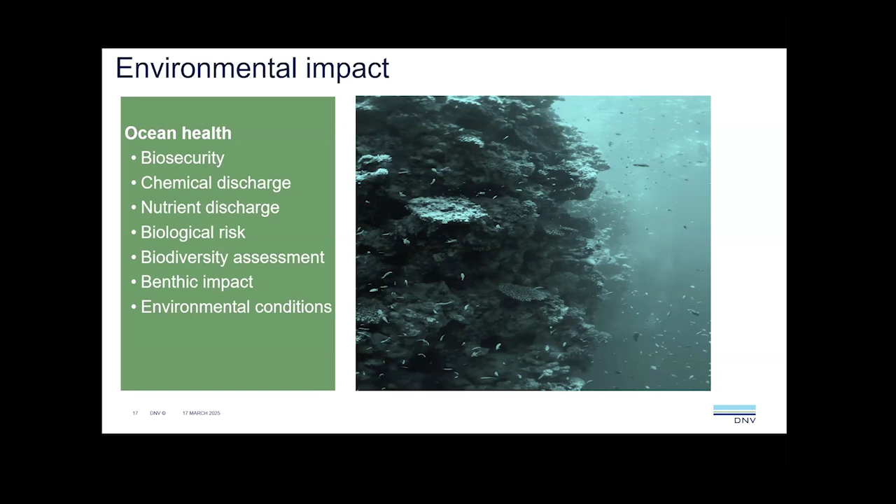Attention, of course, from an assurance point of view is to equipment and systems installed that affect and control this emission to the marine environment. And of course, part of the biosecurity item is to prevent fish escape, where you focus on the barriers and net pen, ensuring no fish escape. Monitoring and limiting pollution to water from fish waste and feed surpluses is, of course, something that we need to pay attention to.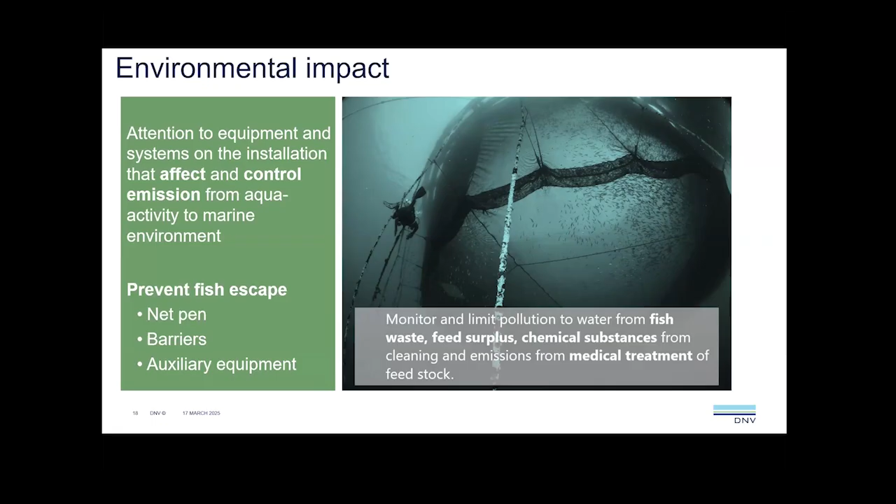Okay, time is running when you're having fun.

So my very last slide looks like this, summing up what you just saw. Usually when fish farming is discussed and risk towards fish farming is discussed, the top two is very much discussed. Partly marine environment, because you need to ensure no fish escape. But there's a lot more to it when it comes to protecting marine environment, and there's a lot more to it when it comes to fish welfare that we need to take care of.

Last thing that I want to air with you is a certain different approach to the aspect of risk, where you could split it into four, where you focus on the equipment and the system put to use.

You focus on the procedures on board, how things are done and what is done, and in what order it is done, and what kind of organization you have on board, command lines and responsibility. And last but not least, of course, as mentioned before, competence, which is mainly mindset and safety mindset.

But I want to remind us that when you do certification and verification of these segments, we focus mostly on the equipment and the systems, and you assume that the procedures, the organization and the competence are okay, that it works really well. And that is something that I think we need to bring along when we ensure safe and sustainable offshore fish farming. Thank you very much, everybody.

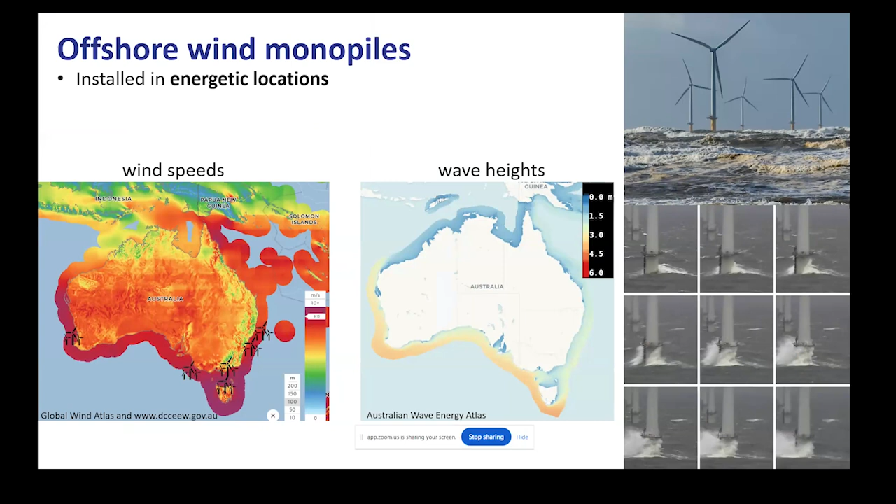All right, so to get us started, clearly we put offshore wind structures into quite energetic locations. We put them in places where it's windy, and because waves are generated by wind, typically these locations will also have large waves. So in design of these structures, we need to account for the forces that the structure will experience during its lifetime. That's the thrust force from the wind, as well as forces from the waves and the current on the submerged part of the structure. And there is also excitation coming from the rotor because the turbine rotates.

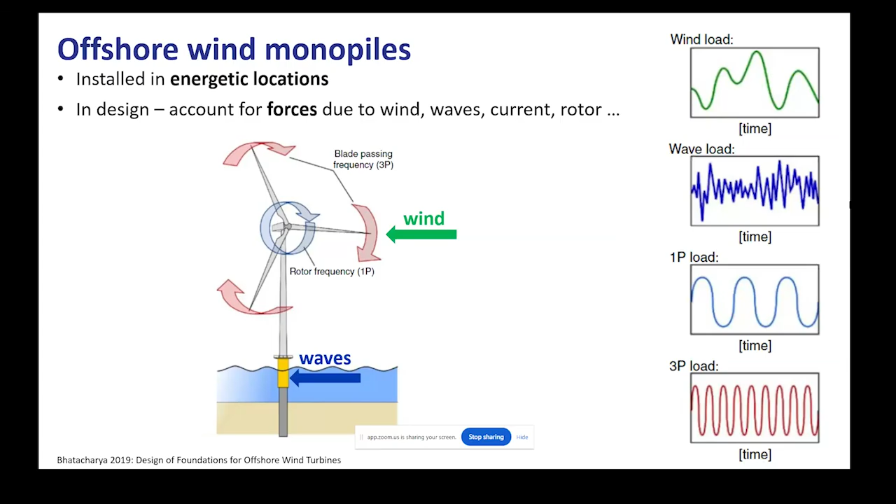And so, like I said, it's already a very congested, busy space, and things get even worse when we also take into account nonlinear wave forces or nonlinear wave excitation. So what are nonlinear forces? In addition to the forces at the main wave frequencies, we also get excitation at frequencies above the linear waves as well as below.

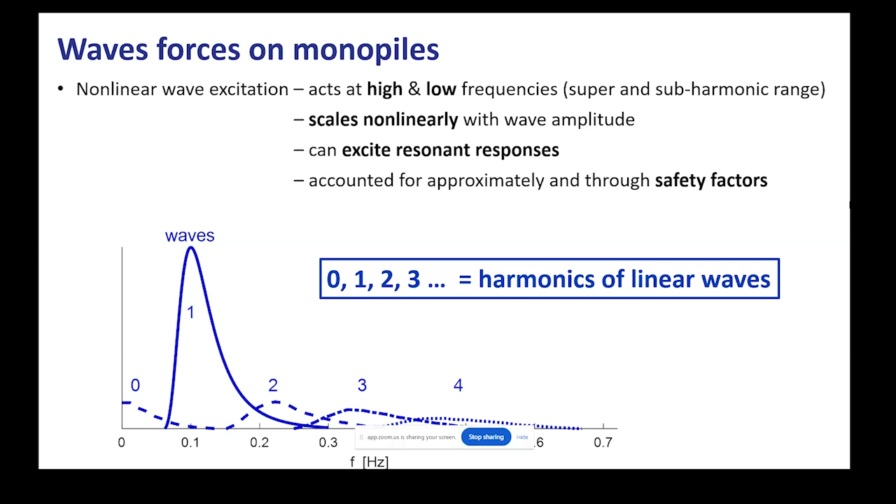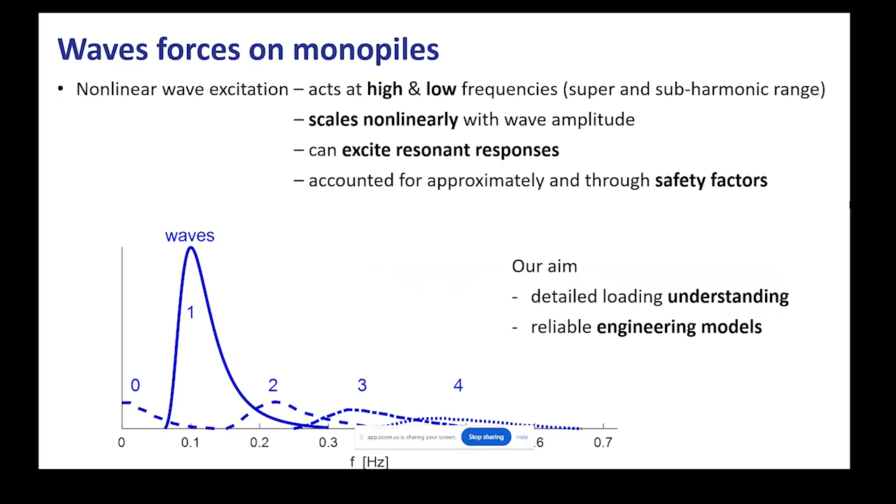And in current design practice, they're not particularly well accounted for. So really the aim of our work is to have a better, more detailed understanding of this nonlinear loading regime, and then also to be able to translate it into engineering models that can be used in practice. So to gain better understanding of the problem, we carried out some laboratory experiments.

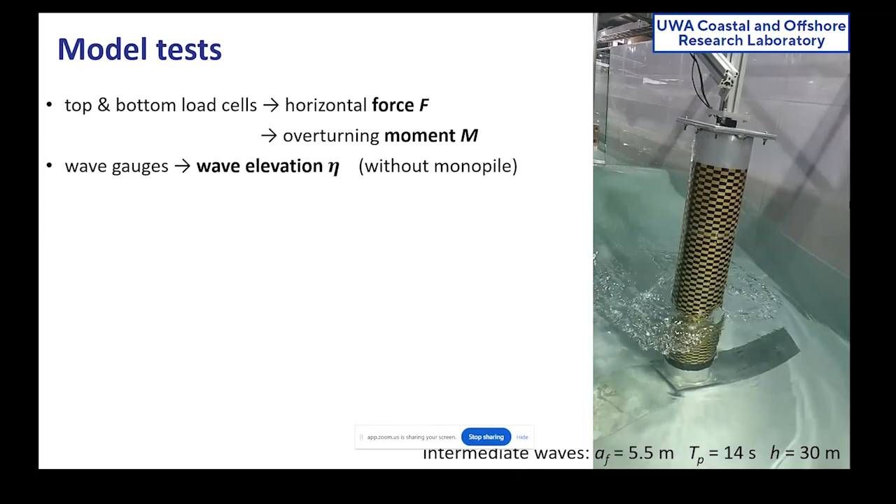So hopefully this video is playing, but I'm just showing you footage from one of the experiments. We've got a wave crest going past the structure, and we are measuring the forces that the structure experiences. So just to give you some background to the tests, obviously these are reduced scale tests. Our monopile was only 16 centimeters in diameter, but that corresponds to about 8-meter diameter in full scale. And the full scale water depth would have been 30 meters.

Okay, so in the lab, we have a wave maker, a machine that is able to generate waves. And we use wave groups. An example is shown here; this is just a measurement from our lab. The reason we use wave groups is because they represent realistic loading history. They are broad-banded in nature, so they contain multiple frequencies, as one would see in a wave spectrum in the open ocean. And the profile of this particular wave group also corresponds to a large wave event in the open ocean. They're also short in duration, so we don't have too many reflection issues in the lab.

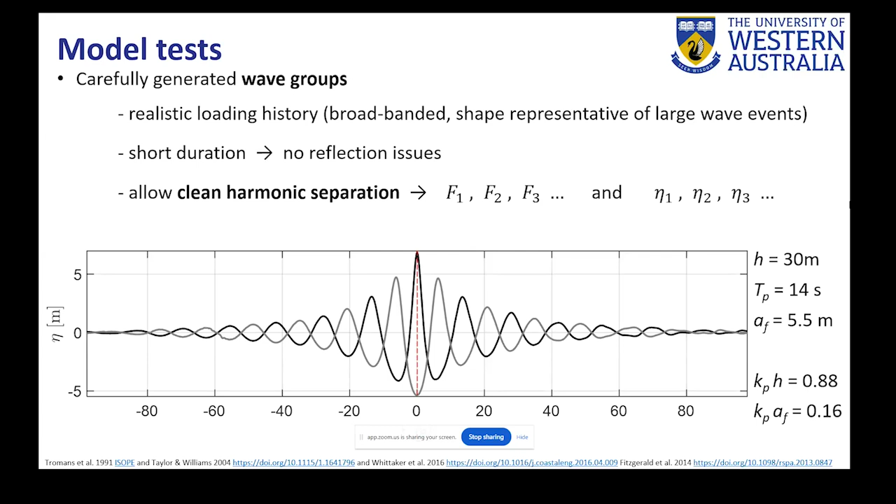And we use a technique where each condition we run multiple times. So first as a condition with a large crest, and then we do the same wave group, but upside down or inverted. And then by combining these different tests, we are able to separate the total measured force into the different harmonics that I introduced earlier. And this will become quite useful.

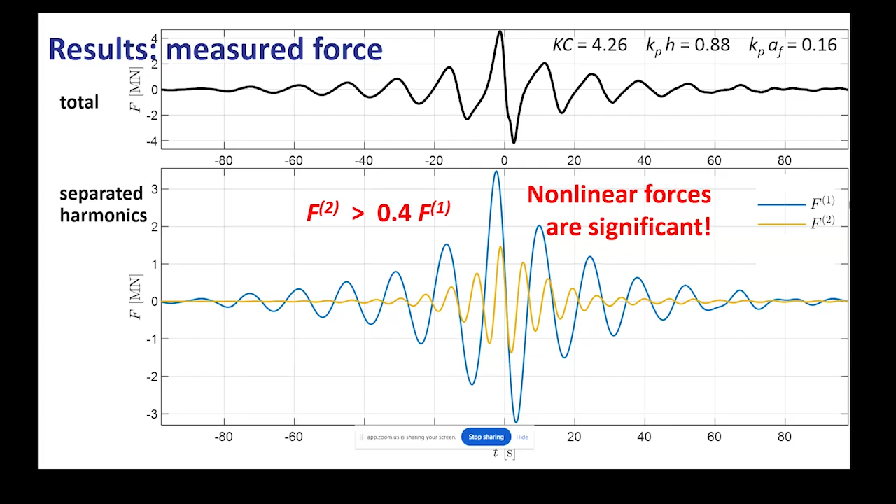All right, so now we have an understanding of the complex loading. Our next task is to try to come up with models that are able to capture some of this nonlinearity. So the current practice for monopile loads is to use something called the Morison equation, which is a combination of an inertia force as well as a drag force.

And because the cylinder or the monopile is relatively slender compared to the wavelength, the fluid kinematics, the fluid velocity, which I denote by U, and the fluid acceleration, which I denote by U dot, can be taken from the undisturbed field. So they can be taken from a scenario as if the monopile basically wasn't there, just because the structure doesn't disturb the flow too much.

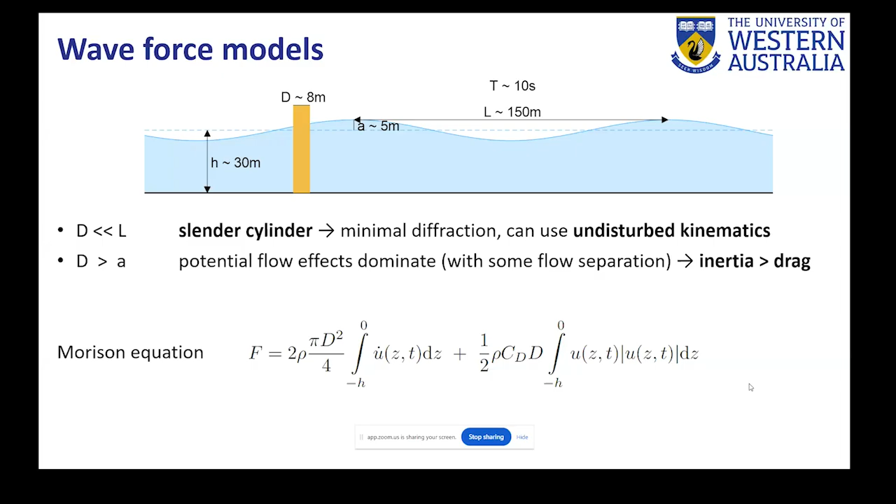And I mean, we get some of the time history okay, predict okay, but it's obviously not perfect. We are under predicting the peak, and we don't have any of this high frequency content. So people have thought about ways to introduce nonlinearity. So for example, we could use nonlinear kinematics, so nonlinear fluid accelerations in the formula, but it does mean we would need these values everywhere in the water column, from the instantaneous free surface all the way to the seabed, and that's computationally expensive to obtain.

Now, another way is to try to basically transform the Morison equation. So transform this vertical integral of the fluid acceleration. We can transfer it into a horizontal integral of just the wave elevation. And we can do a few more manipulations, and we arrive at really a transformed nonlinear inertial loading, which is now expressed purely in terms of wave elevation. So we have gone from fluid acceleration needed everywhere in the fluid domain to just a point property. So all we need to know is how the free surface is moving up and down.

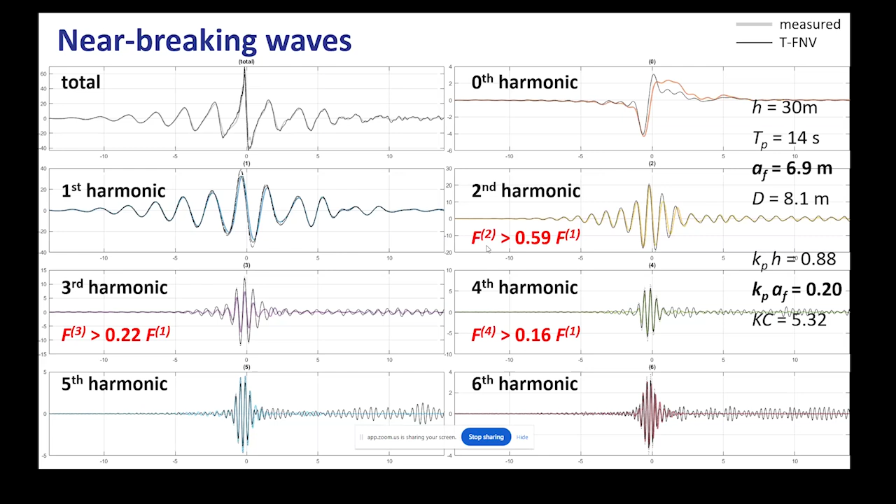Here I've just highlighted how large some of these nonlinear terms get in very nonlinear waves. I mean, the second harmonic is close to 60% of the linear term, third harmonic more than 20%. So neglecting these terms is really not ideal.

All right, so in summary, we've looked at nonlinear wave forces on monopiles, and we've seen that they truly are a significant proportion of the total load, and therefore are important for estimating the ultimate loads on these structures. We have also seen that they have a really broad frequency range, and therefore they could excite resonance and are also important for fatigue loading, and currently are not well accounted for.

But this new transformed FNV model uses only wave elevation history. So it's really quite simple, has low computational costs, and therefore would be suitable for engineering practice, and has been able to capture the main nonlinear features, as we've seen in the comparison with laboratory data. We've got a few things ongoing in terms of where we would like to take this work next.

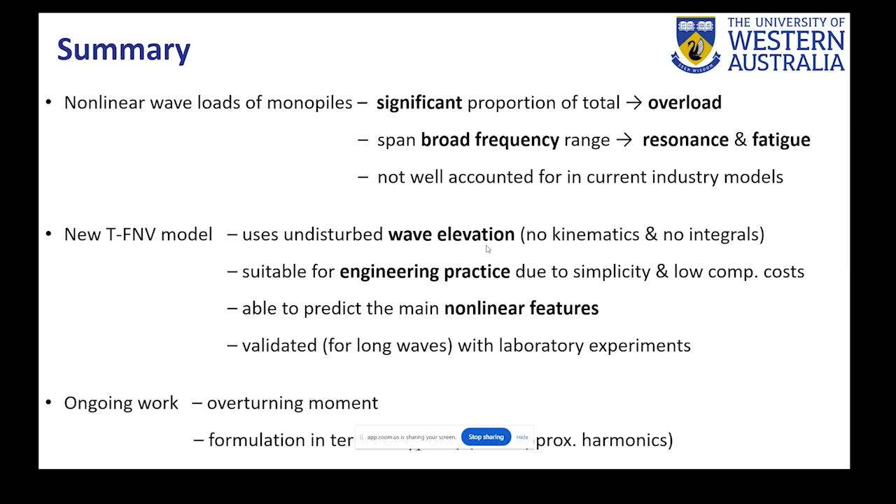But before I wrap up, I just want to mention the implications of this work for Australia. Our wave climate is quite different to the wave climate in the North Sea, where most of the offshore wind has been deployed up until now. Our waves are much longer. So on the left-hand side, we've got the mean energy period. On the exposed southwest and south coast, typical energy period is 11 seconds. Maybe on the southeast coast, which is more sheltered, 7 to 8 seconds. Whereas in the North Sea, the periods are more like 5 to 6 seconds.

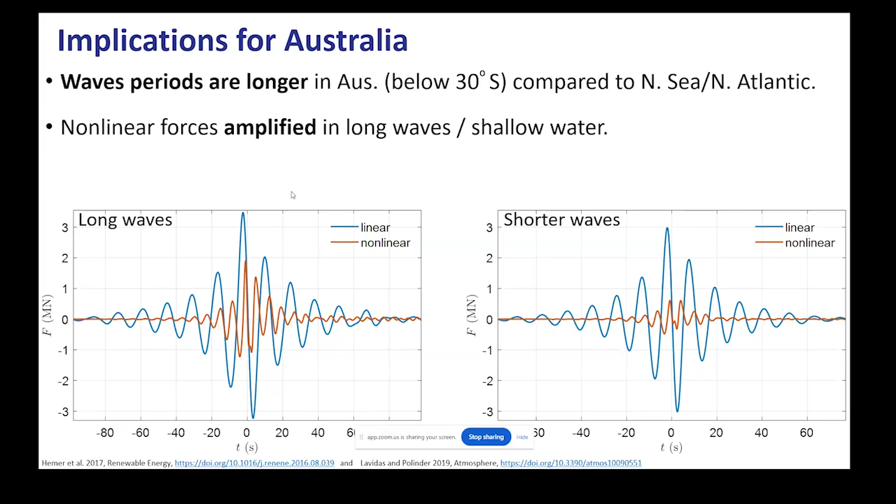And the trouble is that in the long wave regime, which we have in Australia, these nonlinear forces become amplified. So on the left-hand side, we've got a picture of the linear and nonlinear forces on a monopile in really long waves versus shorter waves on the right-hand side. So correctly accounting for nonlinear wave loads is particularly important in wave conditions that occur in Australian waters. So that's all I wanted to say today, and thank you very much for your attention.